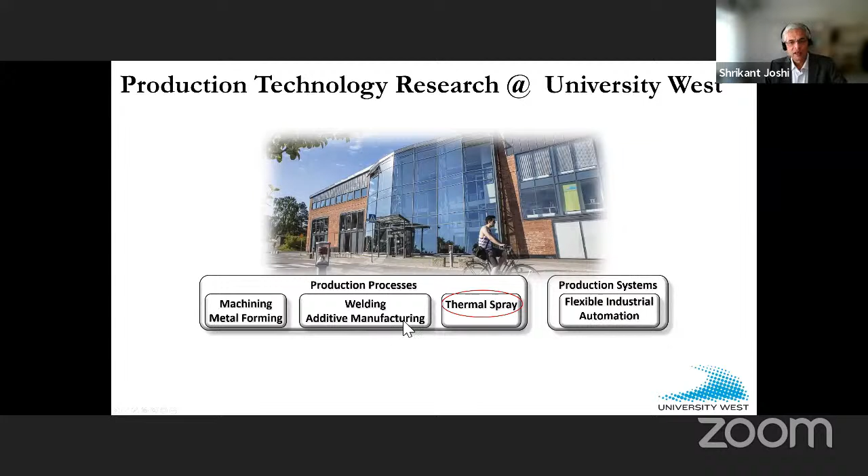Our thermal spray group is a modest sized one. We have 3 or 4 professors and a couple of PhD students. We've also had a culture of periodically inviting the best known names in thermal spray as guest researchers. Right now we have Professor Vassen as the guest researcher. Prior to this we had Sanjay, and even before that we had Ping Xiao from Manchester as a guest professor here.

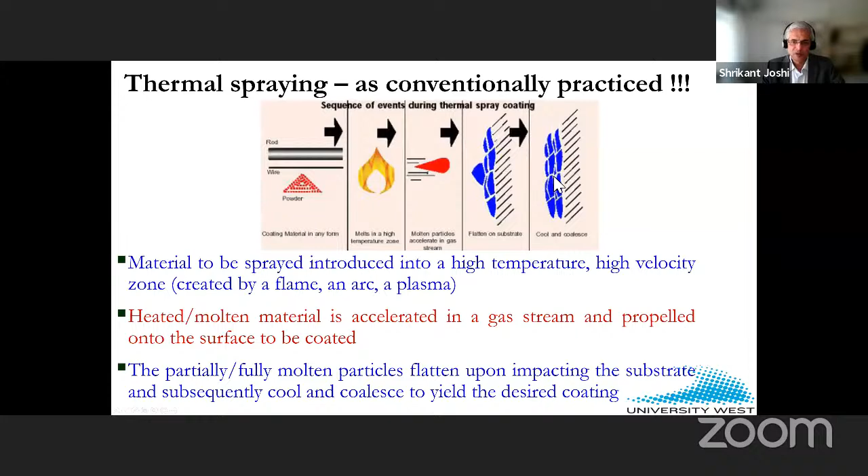You introduce a material from which you want to form a coating, sometimes in rod or wire form, but typically in the form of a powder. The idea is to melt this material, accelerate it to a high enough velocity so that it forms splats, which are like pancakes, on the part which is to be coated. You overlap these splats to cover large areas, and you stack them up to build thickness. So typically, that's how thermal spraying is practiced.

And what is usually the intent? The intent is to ensure that the powder particles you introduce are fully molten to obtain dense coatings, and that they also impact the substrate at the maximum possible velocity, because these are mechanically anchored coatings, so the adhesion strength is well correlated to the impact velocity. So these are the conditions I usually try to meet. And because of this need for high particle velocity, the residence time is typically on the order of milliseconds - all the action, melting, acceleration, impact, has to happen within milliseconds.

Now, if you look at the spray grade powders that are out there, typically there's an upper size limit, dictated by what you can melt during this short residence time. For relatively low-melting metallic powders it could be slightly higher - the upper limit could be 90 or 100 microns. For ceramics it's lower, and depending on the process used it could change a bit. But this is the reason for having an upper limit on your powder feedstock, which is easy to appreciate.

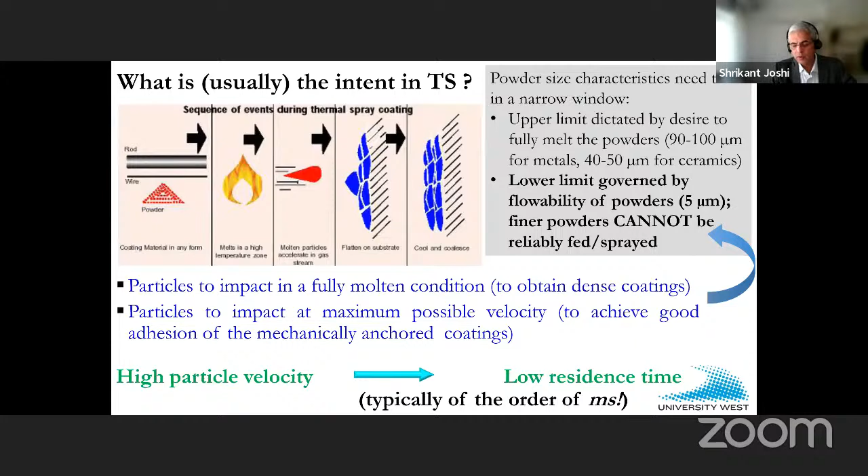But then there is also a lower limit, often dictated by the flowability of the powders. Typically, if your powders are 5 microns or smaller, it's difficult to reliably feed them, and therefore also to reliably coat them. And that takes us directly to the motivation for employing liquid feedstock - it's the most convenient avenue to create finely structured coatings without encountering the feeding problems normally associated with few-micron, submicron, or nano-sized powders, and thereby realize some very unique microstructures.

So there are two ways to do it. The simpler option is to put these fine powders into a suspension using an appropriate liquid medium. The more difficult approach is to not use a powder at all, but use a suitable salt solution, which will hopefully form the material of interest in situ. Examples of these salt solutions are typically acetates or nitrates, sometimes chlorides as well. These allow for very rapid exploration of new precursor compositions or their combinations. Most of all, they circumvent the need for using powder feedstock completely.

Is this use of liquid feedstock radically different? Depends on perspective. Here's a simple cartoon of what a conventional plasma spray process looks like. You have this plasma spray torch, there's a powder that you introduce radially, and all the heat-up and acceleration happens as we spoke about a moment earlier. When it comes to liquid feedstock, the only thing that really changes is that the powder delivery is replaced by a liquid feedstock delivery.

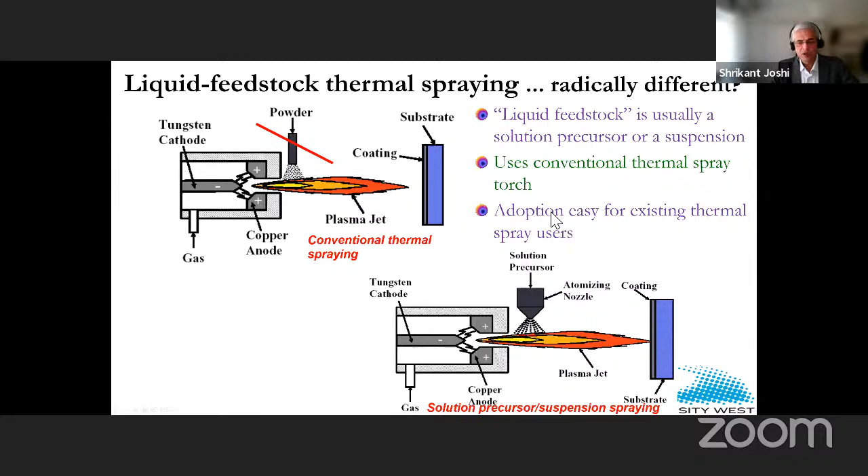The nice thing from my perspective is the fact that it uses conventional thermal spray hardware, and therefore adoption is relatively easy for existing thermal spray users. All that you need is a reliable liquid feedstock delivery system, and there's an increasing number of those available now.

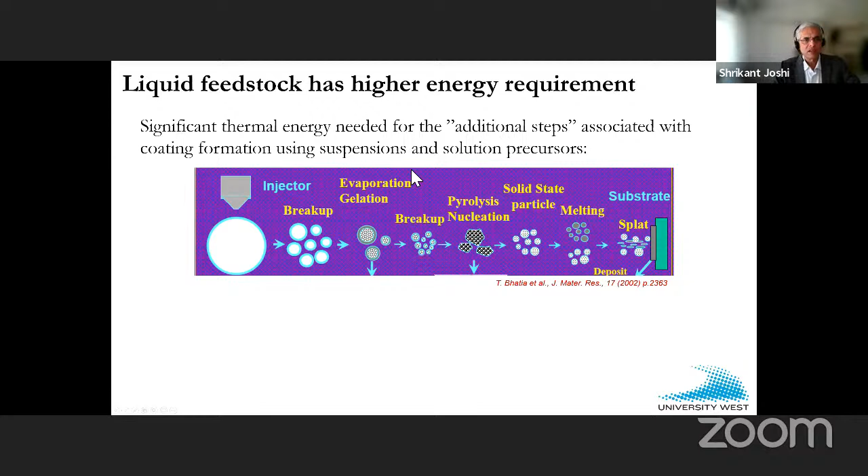One thing to remember is that the use of a liquid feedstock has higher energy requirements associated with it. What you see on this cartoon is from a publication very early on when people started looking at solution precursors. A lot of things need to happen for the precursor to get through gelation, then pyrolysis, then hopefully the powder of interest is formed in situ. From this point on, the powder behaves like one would expect: melting, acceleration, formation of splats. But all of these steps require significant thermal energy.

So if you were to go hunting for thermal spray literature employing liquid feedstock, you would find most of the early work utilizing plasma spray torches, because of this need for high thermal energy. Suspension plasma spray, solution precursor plasma spray are good keywords if you want to start looking for earliest literature on this subject. As we understood the subject more, we got a hang of how the liquid feedstock behaves in a thermal spray torch. People have started dialing down the thermal energy content and still get good coatings using HVOF, perhaps HVAF as well, as I will attempt to show towards the end of my talk.

When we first started work using liquid feedstock, there were several initial concerns, some of which I've listed here. One was that the processing window was quite narrow. The deposition rates were pretty dismal, and one struggled to put on a reasonably thick coating. I remember our first year or two of solution precursor plasma spray - we needed to spray coming in very close to the substrate, so there were substrate heat-up issues. If the jury was out then, most agreed that this was too far from being exciting on the thermal spray shop floor.

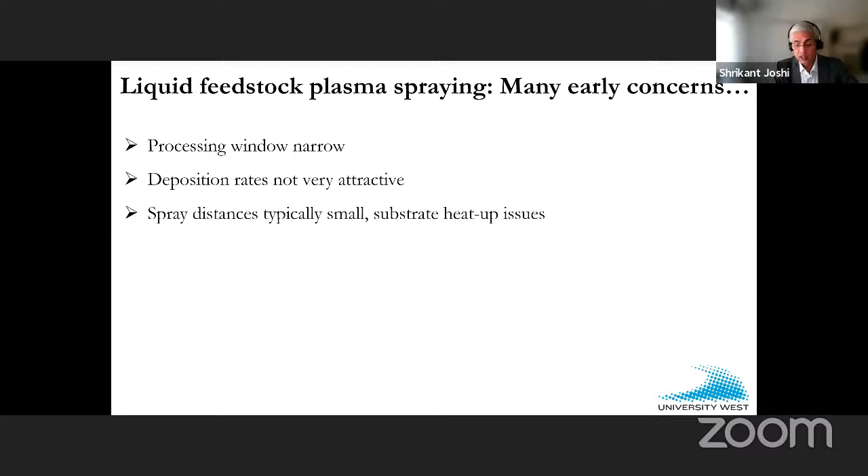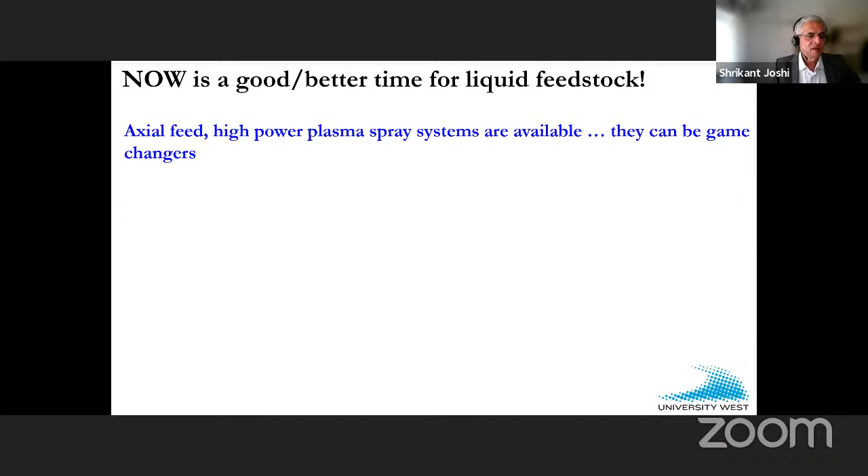Why? Because there are some pretty good axial feed high power plasma spray systems available out there, and they can really be game changers, because I am of the opinion that liquid feedstock did not get a fair hearing when we were all compelled to use radial feeding.

And the reason for that is when you use radial injection, the injection of the liquid feedstock is very sensitive to the injector diameter. It's always sensitive to the feed rate, particularly so when you inject it radially. And then you do not utilize all the energy that is available in a plasma plume. Considering the fact that the liquid feedstock per se needs more energy, we were destined to have problems with radial injection.

The ability to inject this feedstock axially kind of changes the game altogether. It allows very robust injection of feedstock. The deposition efficiencies have gradually crept up in a regime which is suddenly quite exciting, and this is achieved while enabling complete material treatment within the plasma plume as you desire.

So just to recap before we move on, of the two approaches, use of solution precursors and suspensions: suspension is clearly relatively easier since powders are already present, suspended in a suitable medium. In contrast, solution precursors completely do away with the need for powder feedstock, but then you need to go through more steps, and therefore it's far more challenging.

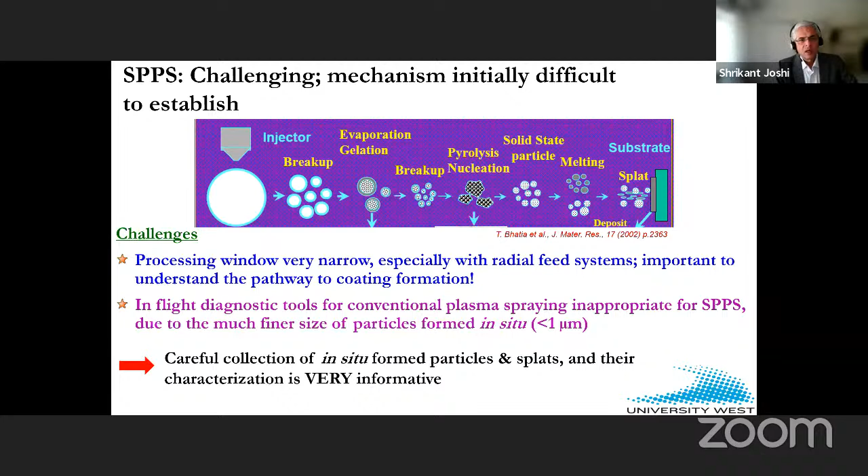So what we started doing during those early days is to attempt to carefully collect, or grab particles in situ, or what we thought was particles, and then also look at splats, and from then derive useful insights on how the process parameters may be impacting coating formation. Won't get into details at all due to lack of time, but just to let you know that collecting these kind of particles in flight have a story to tell.

Many times if you're way off from the right processing window or the sweet spot, you essentially get just gel. That's what you collect. But if you do it right, you begin to indeed form particles of the kind that you would want to form, to get good coatings.

So this was a good diagnostic tool in a sense, or alternative to conventional diagnostics. Similarly, the splat morphologies too are extremely educative. If you are way off kilter, you barely get splats. You get these gels or somewhat thermally decomposed salts.

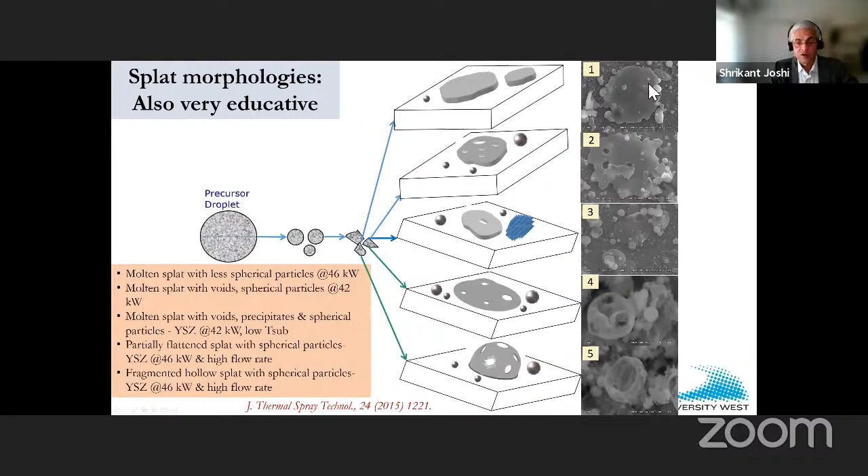If you're right, you begin to get nice dish-shaped splats. It's a little bit hard to see, but this is about just over a micron or a micron and a half. So that's exciting. This is the kind of splats you would be looking for if you're seeking a refined coating microstructure.

So as we went on, I think we learned more about what is the mechanism of coating formation if you use solution precursors. It involved flattening of particles formed in situ. In some cases, some of the gel went through secondary pyrolysis, but I think we got a good hang of how coatings form.

Not only that, this understanding led to a basis for us to be able to begin to tailor microstructures in solution precursor plasma spraying, from getting dense coatings to porous coatings, to even attempt to begin engineering vertical cracks in these coatings. So that was useful.

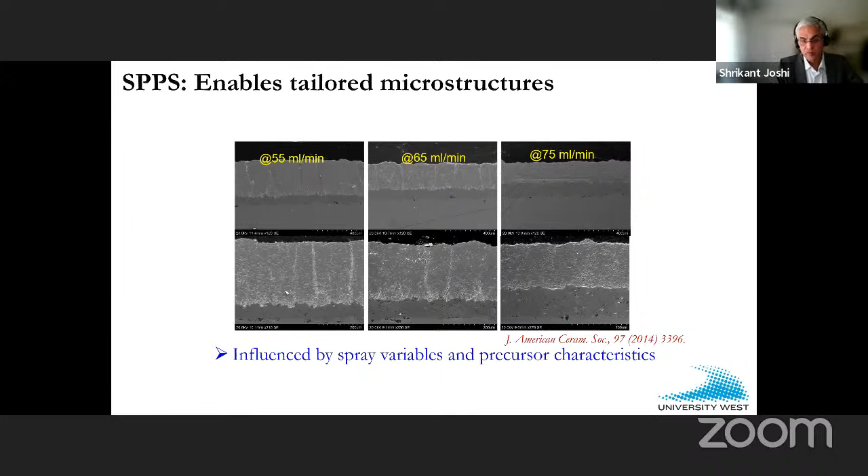As a subset of that work, I think we also began looking at the origin of vertical cracks. There's some very nice stuff you could do by collecting particles in situ, looking at splats, and then seeing how energy considerations lead to crack formation. So that was very useful.

All that work that I showed you up to this point was done with radial injection. And then when I moved here to Sweden, we had this lovely axial feed capable torch. Suddenly that broadens the process window like nobody's business.

So this was first shot, no struggle, and you get extremely nice coatings with what my colleague engineer calls dishwasher fluid. Use a dishwasher fluid as a precursor salt solution and get coatings which are thin, which are dense, which are controllable, and have a very wide processing window without falling away either in terms of crystallinity or the control that you desire.

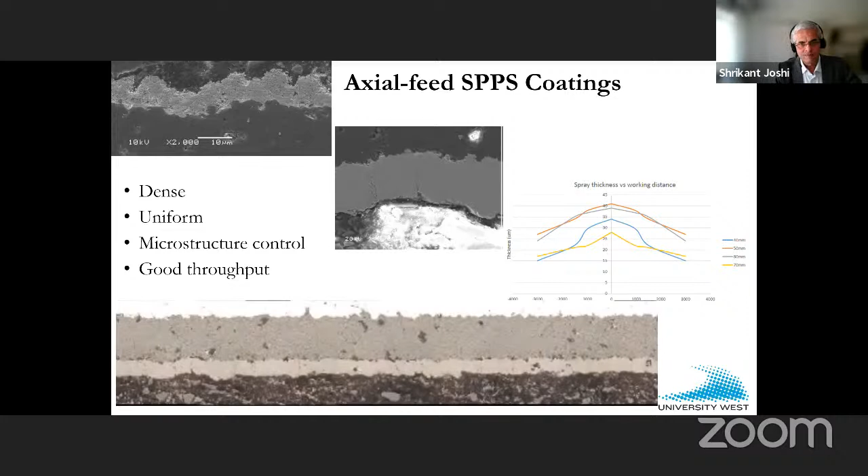So let's move on from solution precursors to use of suspensions.

Why did I say that the use of suspensions is relatively easier? That's because these additional steps, which are involved only in case of solution precursors, are eliminated when you use a suspension. You almost start there, right? And that also reflects in your energy requirements and ease of processing. The number of variables that can mess things up are reduced.

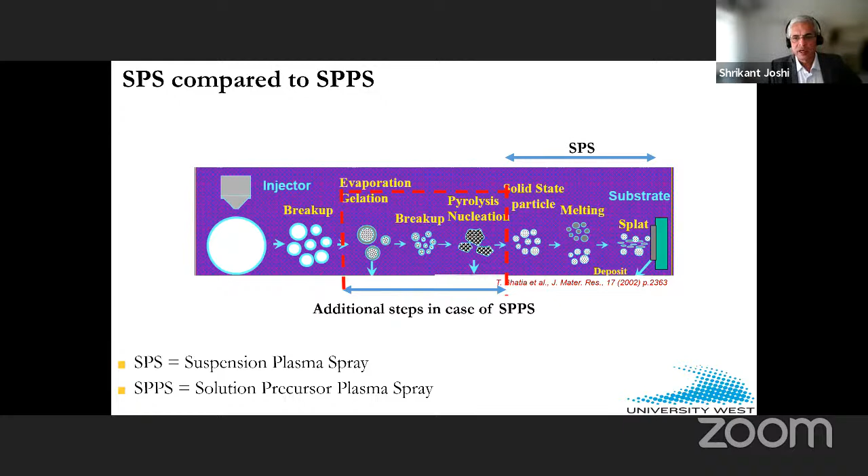As in case of SPPS, the use of suspensions also was originally driven by thermal barrier coatings. The reason being that very early on, experimental work revealed that you have a possibility using suspensions to get some sort of columnar structure, which is not exactly identical to electron beam derived columnar structures, but you get columnar structures which are strain tolerant and therefore bear promise to be used as TBCs.

So people even now typically compare EBPVD and APS, and suspension kind of lies somewhere in between and has advantages that are handpicked from both of these processes, which are relatively well established. It's much cheaper than EBPVD. It yet provides a columnar structure. It has potential to develop coatings with low thermal conductivity.

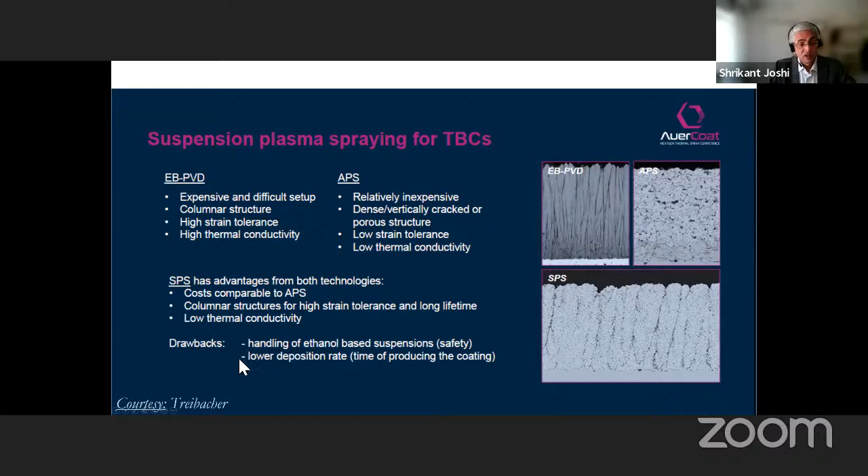You have a wide choice of suspension media now available, although most early work showed that if you are to target a columnar coating, you would have to use ethanol as a medium, which the industry does not necessarily like. There were also, as I mentioned, some reservations about deposition rate, but I'll show you that that was passed.

So some quick results from our own work in our thermal spray group here by my colleagues. One, we have been using SPS for thermal barrier coatings for a long time. We have demonstrated that one can almost control the columnar structure at will. You can control it for an identical suspension by varying the plasma spray parameters, or you could use different kinds of suspensions by varying the type of solvent, the loading rate, and also playing around with the particle size that constitutes the suspension.

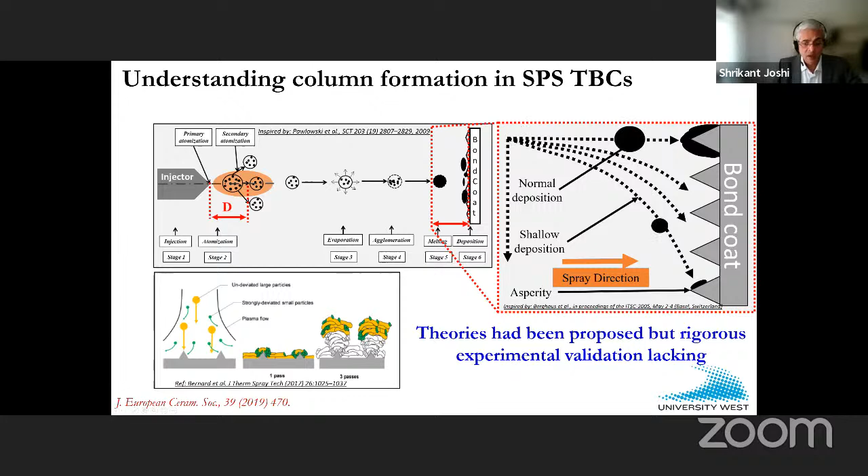We also spend a lot of time trying to understand column formation. When do you get columns? When do you not get columns? There were theories which had been proposed, very logical ones, but we spent a fair bit of time to validate experimentally the fact that we can indeed engineer columns or avoid them completely.

For example, these are illustrations of how the coating buildup occurs when you use ethanol or ethanol-water mixture. What I'm not showing here is if you used water, you get an entirely different coating formation. So if your target is getting a columnar structure, for most part, one would use ethanol, while use of water would give you a relatively dense coating.

One advantage of trying to dig into this column formation mechanism was also the fact that it allowed the thermal spray community to get a hang of how to avoid columns, which is necessary for many non-TBC applications. So that's something to remember for later.

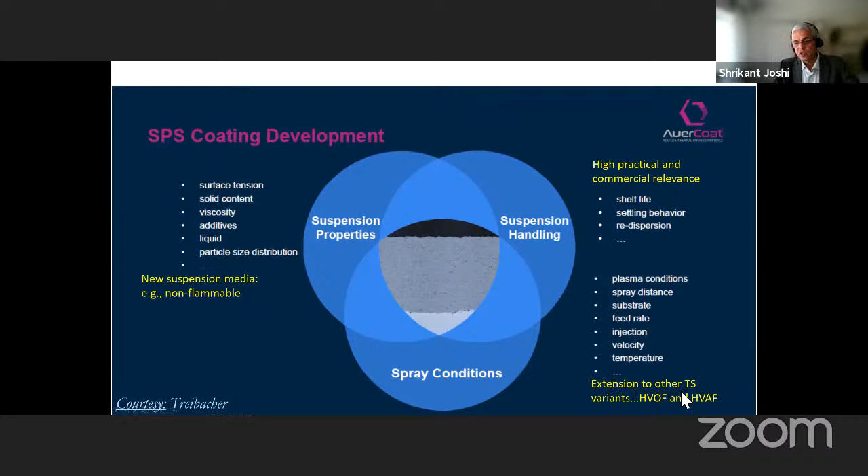And then, of course, there is this big chunk of applications to be harnessed if you're able to use suspensions with other thermal spray variants such as HVOF and HVAF.

A quick example from Treibacher about using an alternate non-flammable suspension medium. They've shown recently, for instance, that one could move away from ethanol, use a non-flammable, at the moment proprietary medium, and still get very good columnar structure.

The other thing that comes out from this particular slide, which is a reconfirmation of what I showed earlier, is that by increasing the spray power, one can get more pronounced columnar coatings and a higher deposition rate per pass. So it's a good area to be in, the development of new suspension media.

We were talking a little bit about throughputs. Now this is a TBC example. You're beginning to reach almost 50% solid loading YSZ coatings using the suspension route, and this puts you in a regime that's almost the same as what you'd typically get using a powder, as I'll try to show you later if I have time. The same is true for chrome oxide, for example.

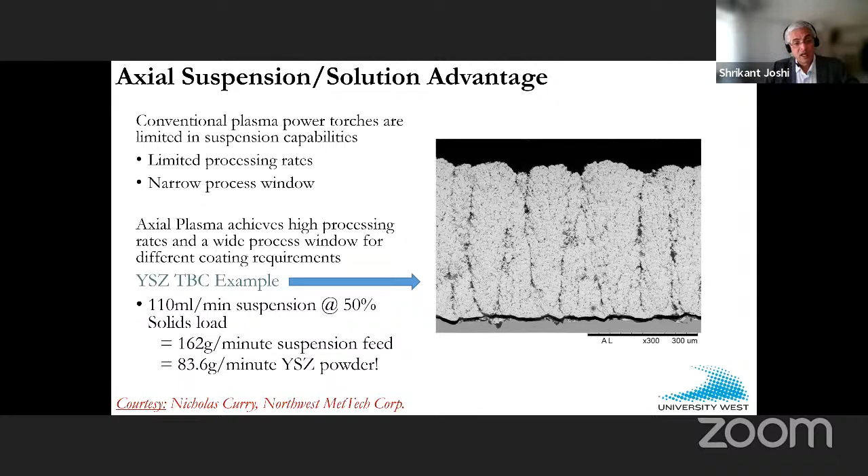Treibacher has been our partner in some of this work. They've shown that you can bump up the solid loading to as high as 50%, and that puts you in a very interesting regime already.

Some real numbers from our own work - before my time, honestly, this was done way before my time, but this data is from our lab here in Sweden. When we started doing these TBCs using suspension yttria stabilized zirconia, the typical solid loading was about 10%. To coat a 300 diameter test specimen, 100 height, with 300 microns would take us about 4 hours, and it would consume about 12 liters of suspension.

Fast forward to today, and we use barely 1.5 liters of suspension. We can accomplish this task in about 15 minutes. And then it begins to become really interesting for thermal spray practitioners.

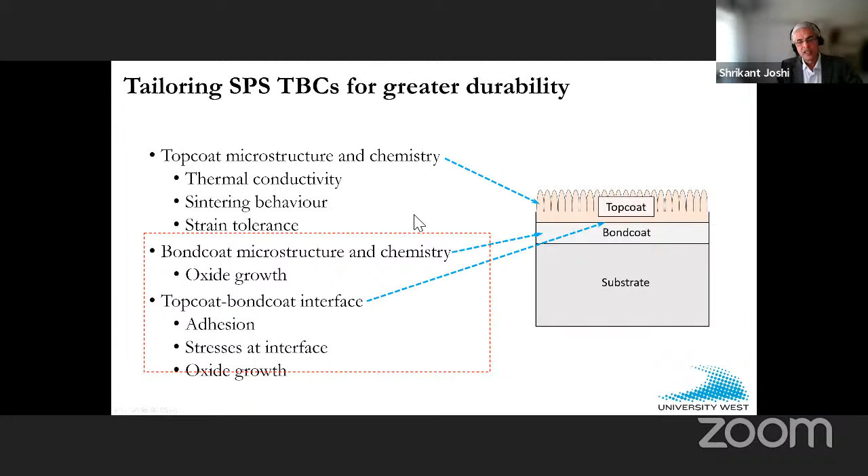We have also spent a lot of time trying to tailor SPS thermal barrier coatings for enhanced durability by looking at a variety of different things. We have been looking a lot at chemistry, moving away from yttria stabilized zirconia, for example. We have been looking at microstructure, column density, and things like that. We have been looking at architecture, single layer ceramic TBCs and multi-layer ceramic TBCs. It's been a long but very educative ride.

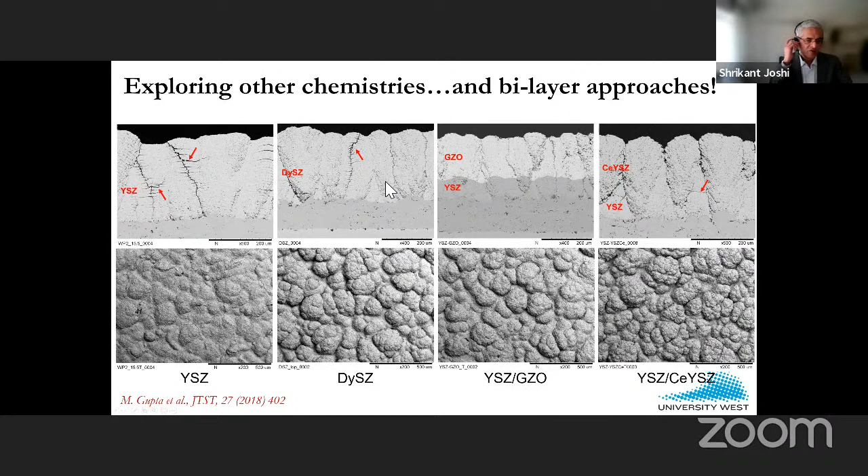Some examples from our group again. I spoke about multi-layer TBCs, trying to combine yttria stabilized zirconia and gadolinium zirconate. Also looking at some other chemistries of interest in an effort to reduce thermal conductivity and enhance coating lifetime.

To close the loop, we've been looking at not just microstructures, but how the coatings perform in thermal cycling situations, in burner rigs.

The other interesting area has been to look at bond coat topography and its influence on coating microstructure and lifetime. This is some of the work that looks at different pre-coating surface treatment on the bond coat, pre-coating of zirconia. As you see, you get remarkable differences in column density that influences coating life.

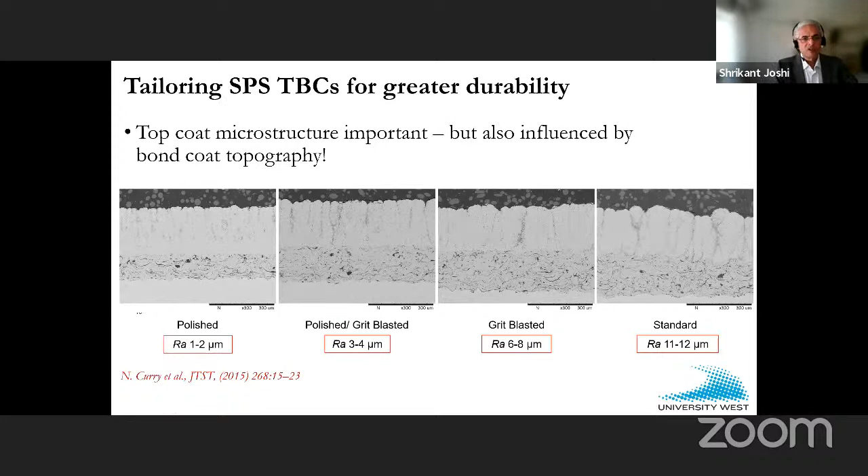Let me spend a little bit of time now discussing whether, and this has been a question for a long time, there is life beyond TBCs and now environmental barrier coatings for liquid feedstock. Because until a few years ago, a very predominant portion of the literature was targeting only TBCs.

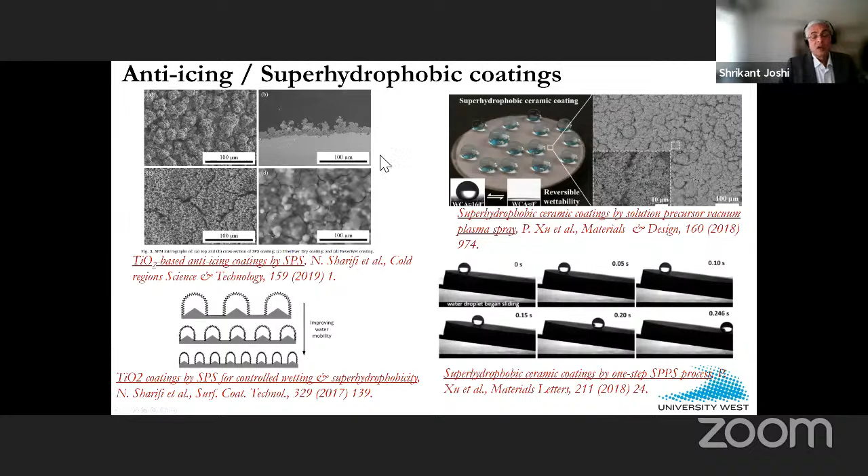But if you look around now, there indeed is some increasingly exciting work in areas that are phenomenally diverse. There is some work, especially from Christian's group, on anti-icing and super hydrophobicity. Quite a bit of that.

This is similarly some work that I did before moving to Sweden, targeting antibacterial applications using solution precursors - very complex precursors. If you have good friends in the chemistry lab and have a beer with them, it helps once in a while.

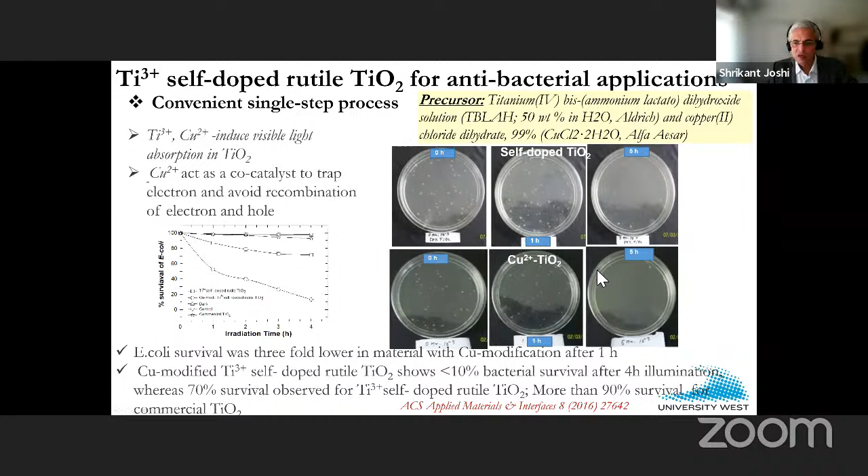It gives you coatings of a nature that are very hard to achieve by the powder route. In this case, the intent was to achieve Ti3+ self-doped rutile, and the chemistry guy said, you use this and you have a good chance. And sure enough, we did get coatings which showed extremely promising antibacterial performance using those kinds of complicated solution precursors.

There's a lot of action also in the area of electrode coatings. We are at the moment also working on solid state thin film batteries. There's been a fair bit of work in this group on SOFCs as well, as indeed elsewhere.

Fairly interesting. I just wanted to show this snapshot real quick of the immense possibilities that exist using both SPS and SPPS for realizing a vast spectrum of coatings, which seem complicated, but you do get them in a single step by engineering the solution precursors, for example, in a good way.

Over the past couple of years, we have also begun to look at what we believe is a very large segment of coating applications in the industry, which is where and whether we can begin to use the suspension spray route to realize some tribological coatings. We kind of know what the boundaries are, what feedstocks are, what kind of materials are exciting, and we know now pretty good how to tailor the suspension in a certain way.

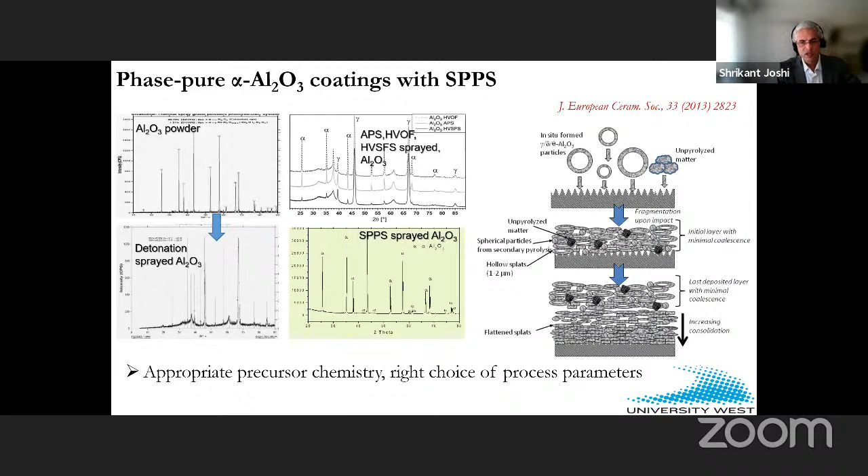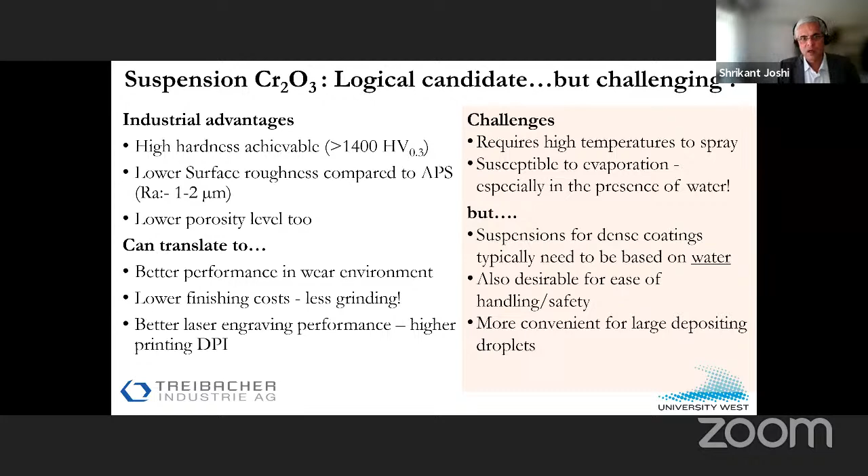So this was our modest beginning with SPS alumina using powder sizes which are 2 to 3 microns and lower, and we got pretty good wear properties, and that kind of encouraged us to move on to chrome oxide, for example, because this is an interesting material with significant industrial applications. Anilox rolls is a good example.

The other reason why it's a good application to target is because we believe that using suspensions can give you much better as-coated surfaces, which will reduce the burden on polishing and grinding, which is an absolute must for an application like an Anilox roll.

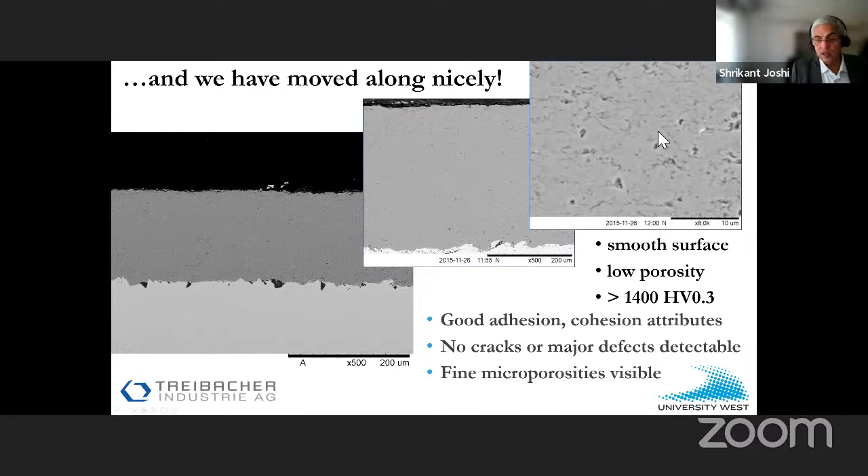We get very good chrome oxide coatings, this was all with 40% solid loading, and we've built on that further. First was to see if we could carry that to an HVOF, and this is part of Jarkko's PhD work, during my short stint at Tampere.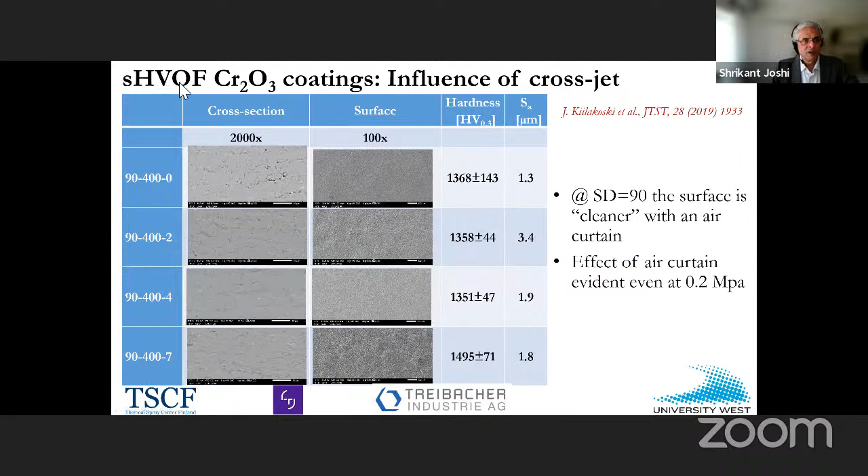And if you manage to optimize the process right, and we tried several things here, looked at spray distance, looked at employing an air curtain to reduce fines, you can get really good coatings even using suspension HVOF, which gives darn good wear properties.

Now the challenge is to push the envelope further, and try and spray with higher solid loading, and therefore improve throughput, reduce costs, and stuff like that. So there's some early work using higher loading, but this is still work in progress, and there is quite a bit of effort now being invested, especially in Treibacher, for example, to take this out.

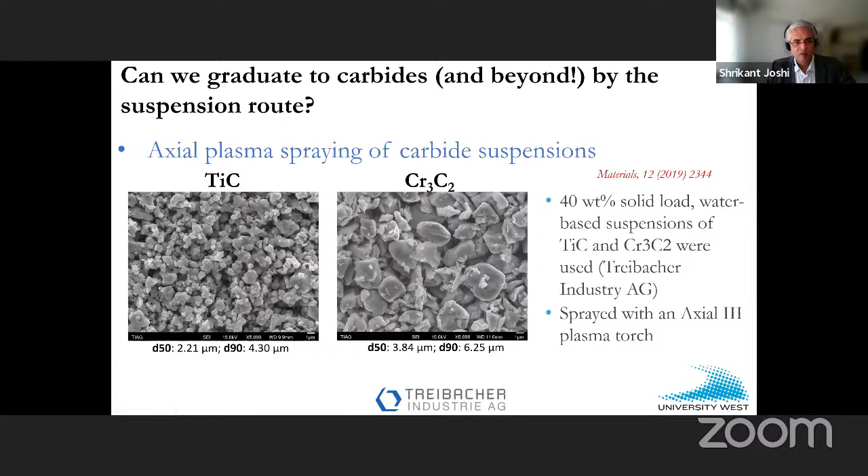Right, so alumina, chrome oxide can be graduated to carbides. So this is kind of a one-off work, I must admit, on using titanium carbide and chrome carbide in suspension form, without any binder, mind you. And we were kind of surprised to get pretty good coatings of titanium carbide and chrome carbide.

Good wear properties. We have tried to build this further, and that's how the idea of hybrid processing using suspensions originated for us. But for me, the story is a little bit older. This was when my colleague in my earlier job, Shiv Kumar, was doing his PhD, and we had just begun to do some work on solution precursor plasma spray.

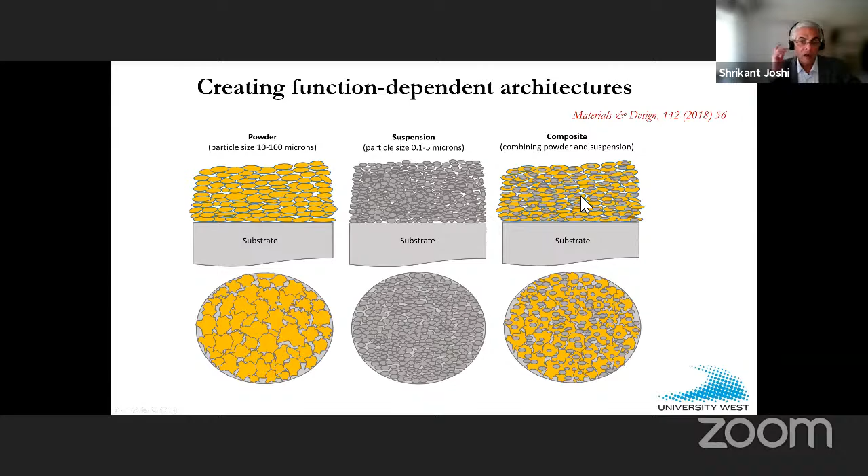What fascinates me about hybrid processing is the ability to create many different function-dependent architectures utilizing building blocks that are so different in size. If you combine typical powder splats and suspension, you can get a very unique structure in the form of a composite coating, and this can provide flexibility that otherwise does not exist.

There can be very interesting ways to combine these two building blocks by introducing powder and suspension simultaneously if you want a composite, or sequentially if you want a layered architecture. Imagination really is the limit. Or you could tweak these relative feed rates on the fly and get functional grading. So you can do many fun things if you're able to get this right.

But by the time we got here, we were kind of addicted to collecting powder samples in flight and seeing what's going on. The first question was pretty mundane at that time: can we first of all spray powders and precursors together? Is there a processing window that allows us to address powders and precursors at the same time?

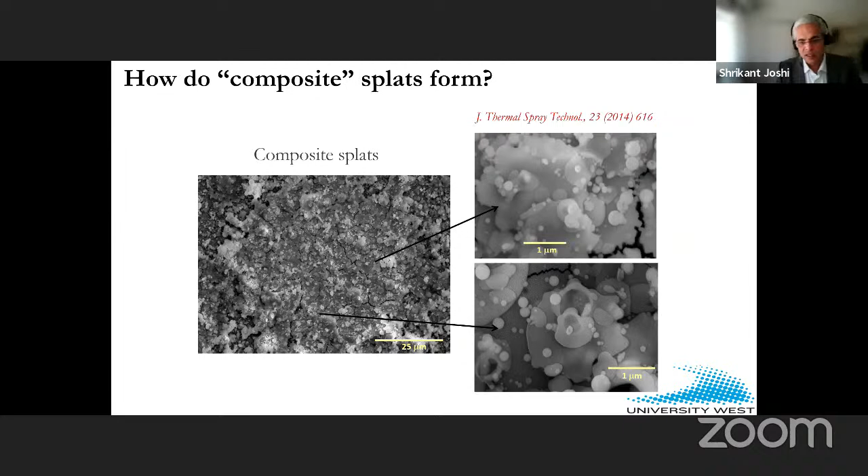So you can also see this impression on a splat. If you're careful, and as biased as I am, imagine this is a big splat from the powder, and all these tiny things are actually small splats derived from a solution precursor. So even in a splat, you see these two entirely different scales, and it reflects in many different ways depending on the application of interest.

Here is an example where we had used yttria stabilized powder and the right kind of solution precursor to also form yttria stabilized zirconia, and that serves to toughen this in a way. So we found these coatings to be ideal when you wanted a combination of thermal cycling, lifetime extension, and good erosion resistance, for example.

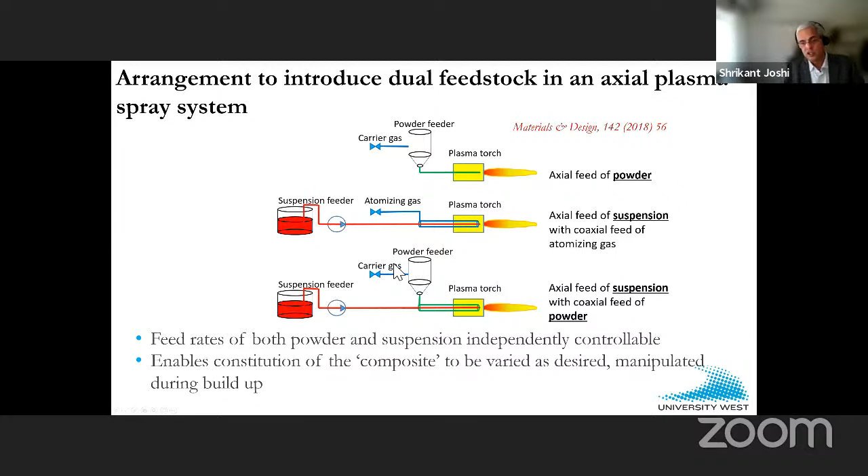And we've also done this for a couple of other systems at that time. Given the promise of this hybrid feedstock approach, we've here at University West spent a fair bit of time coming up with an elaborate arrangement that allows us to effortlessly introduce both suspension and powder feedstock simultaneously or sequentially into our gun, and we've played around quite a bit with that now.

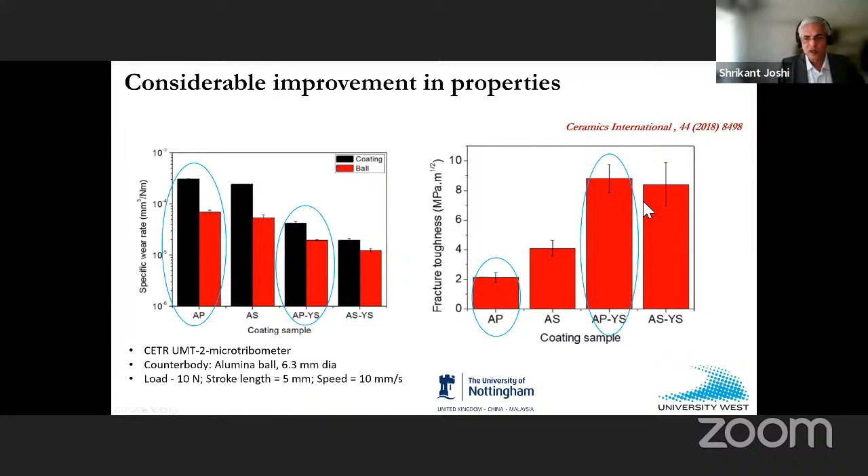We've formed composite coatings like alumina YSZ. This is some work that Tanveer did using some of these coatings, and the benefit of using these kinds of reinforced coatings using a hybrid approach was quite clear - much better fracture toughness, much better wear properties, and stuff like that.

Some more examples, alumina chromia. This is something that was done by Radek's group in Prague. And we've kind of carried this on in a sense - we are now looking at other exciting hybrid systems.

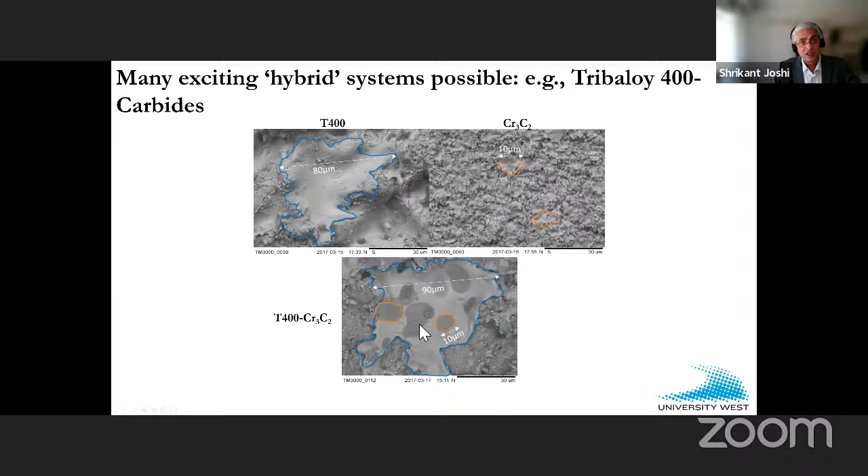One is incorporating carbides in, let's say, a matrix of Tribaloy. No good reason to use Tribaloy actually, except for the fact that we wanted to try this out and we had a Tribaloy 400 bottle sitting on the shelf there. But what this does is clearly show you this multi-component splatting in situ, and the ability, of course, to control the carbide content at will and get good properties.

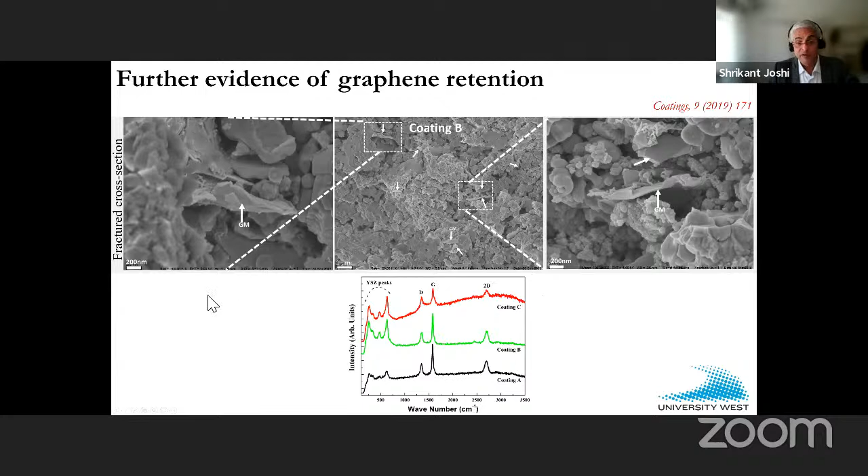We've done since then many different things. Use this liquid feedstock approach to incorporate graphene in many different matrices, and it's not as if you need to go hunting for graphene. Sometimes there's a tendency for us researchers to do that, but this is everywhere. And we've confirmed this with Raman, we've tried to quantify that.

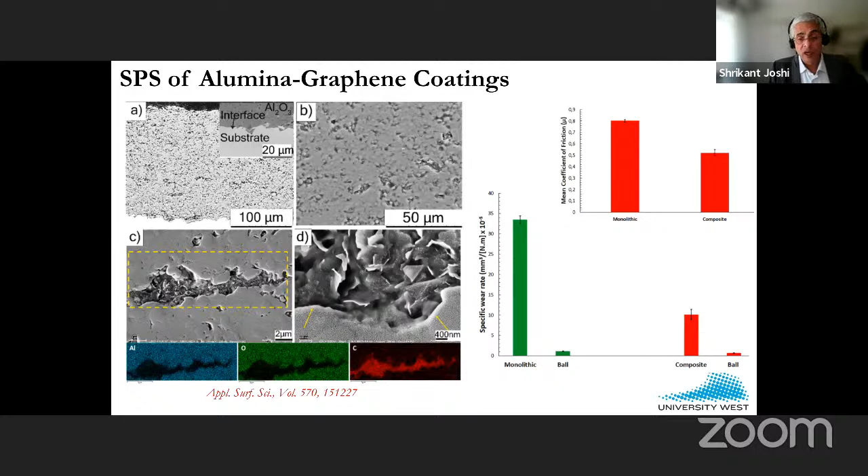We've done wear tests with it. We've also, after this work with alumina, incorporated graphene in yttria stabilized zirconia and thermal cycled that, shown it to survive up to temperatures as high as about 400 degrees. So yeah, we love this hybrid approach in a sense.

Some of our recent work is on solid state battery materials, thin film batteries. We've essentially started with two different materials at the moment, lithium titanate and NMC.

I think this is pretty good for a first shot, but this is the subject of a recent project that we've got, and we're kind of excited about this. We are not self-sufficient in terms of being able to address issues of electrochemical activity, etc., but we do work closely with the battery lab at

Uppsala University to do this kind of stuff. So where do we go from here? We really wanted to do something wild and see if we could use suspensions with HVAF. I almost feel stupid now because at the beginning of my talk I said liquid feedstock requires a lot of thermal energy, right? And now we have traveled quite a distance and are talking about deploying suspensions with HVAF, right?

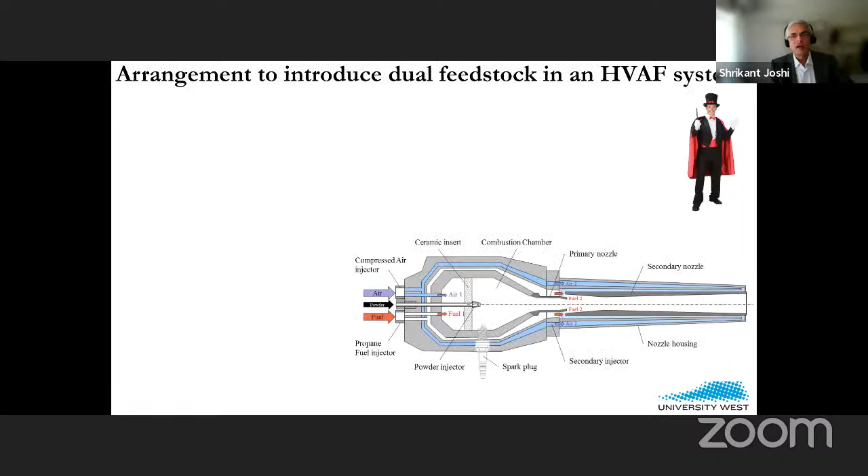Yeah, we've done a fair bit of experiments with this idea and shown that if you're careful, if you have good engineer colleagues, you can do this. You can overcome the very high back pressure that, as one might imagine, is present in an HVAF, but still get the suspension through and do some pretty good stuff, right?

One of these involved incorporating the same chrome carbide that I showed you earlier in Inconel to try and combine good wear properties with good corrosion properties, with good wear as well. So we did that.

More recently, we've attempted to incorporate graphene as a lubricating additive, let's say, to reduce friction coefficient in nichrome chrome carbide coatings. Yeah, we know this still needs some engineering work, but clearly there is early promise to be able to do this, right?

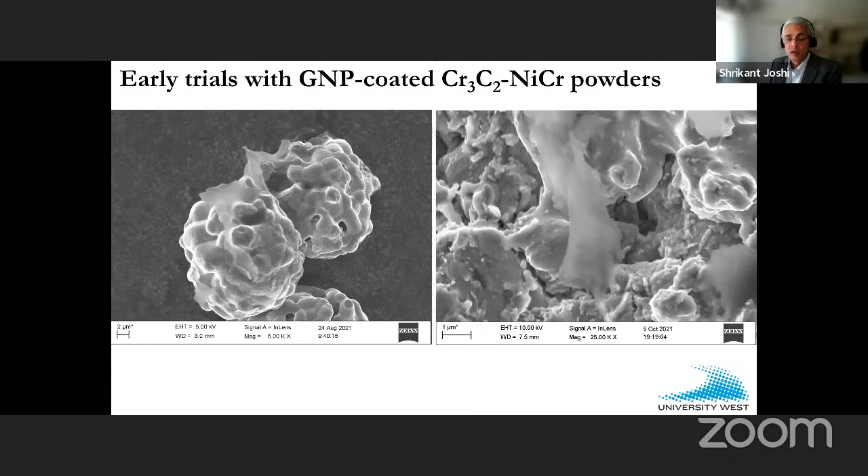We've also been using this hybrid approach to now look at a variety of solid lubricants. The hexagonal boron nitride is just one example, but you can do that. Also some good work combining capping of chrome carbide nichrome with graphene nanoplatelets and supplementing the graphene in suspension form by using the hybrid feeding.

I see that I'm almost out of time, so I would like to leave this here. I hope I gave you a flavor for what use of liquid feedstock can do. I think it brings a lot of new excitement to thermal spray. Granted that it is work in progress, but I think there are many new applications domains that beckon if we can do it right.

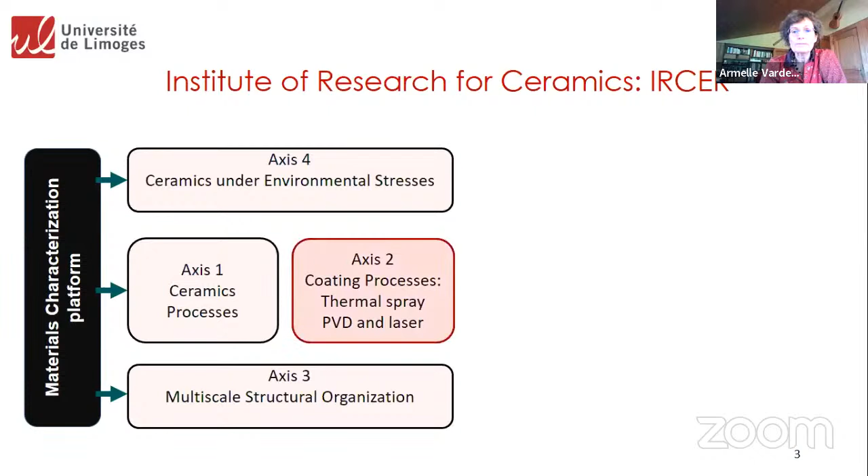I'm working in the Institute of Research for Ceramics in France. This institute is part of the University of Limoges, but it's also part of the French National Center for Scientific Research, CNRS. In our lab, we have 4 teams. For the people working with coating, we are involved in the second team, called coating processes. In this team, we deal not only with thermal spray and cold spray coatings, but also with PVD and laser coatings. There are 47 persons in this team.

Our specificity is that we have developed a joint lab with the French Alternative Energy and Atomic Energy Commission, the French CEA, which is in charge of all the nuclear plants in France, and these are becoming more and more important for producing our electricity. We are developing specific coatings able to sustain extreme conditions. Just 3 years ago, we also set up a new joint lab with Safran and Oerlikon for thermal spray and PVD coating.

The name of this lab is Proteis, and it comes with its own technological platform called Sapphire. You can see the building here, this technological platform, and here our lab - about 400 meters from our lab in the center of France, Limoges. The good thing is, with this technological platform, we have access to the most recent equipment in PVD, but also in thermal spray. For example, we have now, and will soon get, the Surface One equipment from Oerlikon. We also have access to equipment for testing coatings in real use, but only for aeronautical applications.

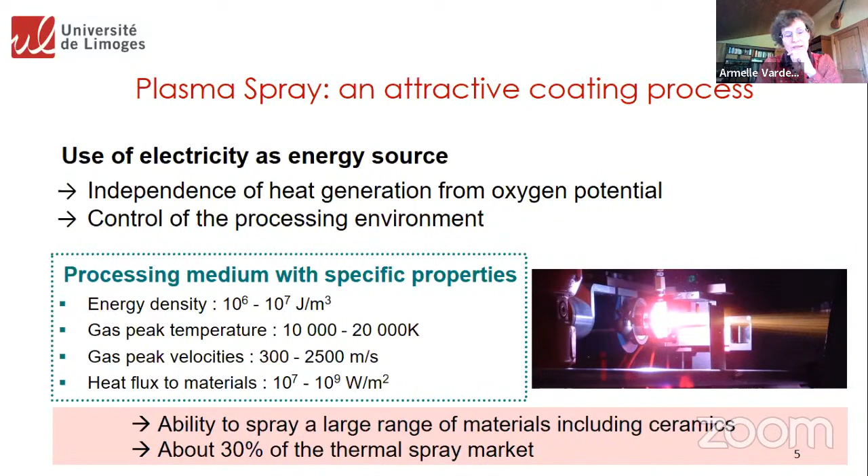Now, if we look at the thermal spray market, plasma spray is about one third of it. This was reminded by Professor Singh yesterday, and it's an important process. If we look at the process itself, it's not so different from other thermal spray processes. We can divide this process into 5 subsystems. Why 5? Because each subsystem is described by specific theory and specific equations.

First, we have the formation of the plasma. Second, the injection of the material into the plasma jet - this material can be a powder, but as reminded and well explained by Shrikant, it can also be a solution or a suspension. This material is injected into the plasma jet and processed there. After that, it will be accelerated, melted, and it will impact on the substrate where it forms the coating. We also have to take into account the motion between the torch and the substrate, which affects the growth of the coating, as well as the coating and substrate temperature during deposition.

But if we look at these 5 subsystems, they are interconnected, of course, but everything begins in the plasma torch. So the plasma formation will affect all the other subsystems, and if there is some problem with this plasma formation, you will find the problem also in the other subsystems.

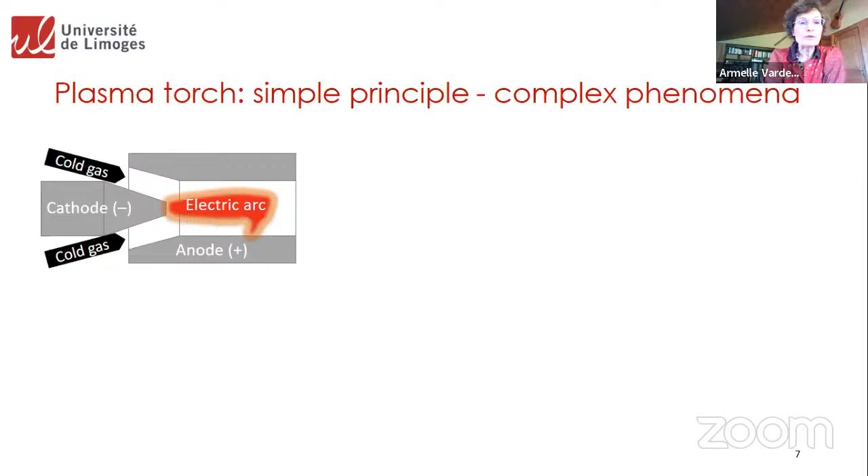The cold gas is injected around the cathode. Now, in most plasma torches, we will have some swirling injection around the cathode, and some arc will strike from the tip of the cathode to some point in the anode. It has to connect to the anode, and it connects thanks to a small, thin, but very hot and so very low density gas column.

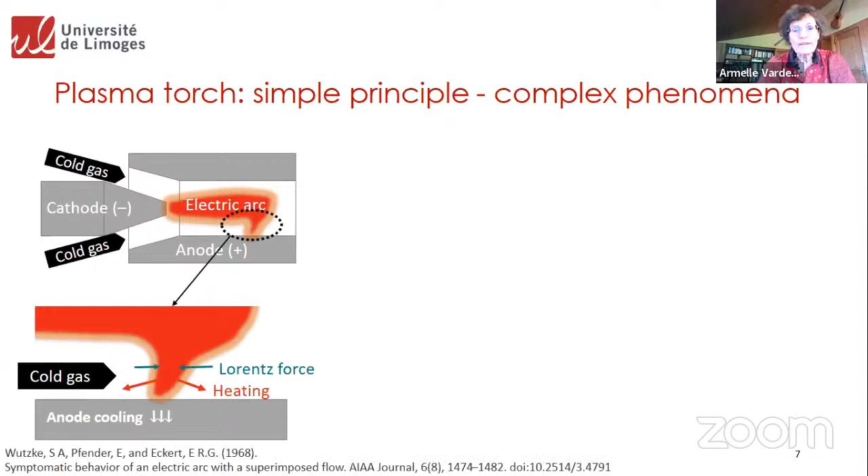Because of this low density and hot temperature, this thin column will be subject to some force from the cold gas flowing in the boundary layer close to the anode, but it will also be subjected to the Lorentz force produced by the electromagnetic field resulting from the circulation of the current and the specific curvature of this thin column. And it will also be subject to some heat phenomena because it will undergo a very intense cooling close to the anode wall, and at the same time it will exchange heat with this anode.

So if you take into account this force balance, this energy balance, and also some possible acoustic phenomena in the cold gas upstream of the cathode, you will get this type of arc voltage. The voltage is one of the most important features of the plasma torch, and it's really the language of the torch.

If you look at the voltage, how it changes, how it varies with time, you can understand a lot from the operation of the plasma torch, how the arc is moving, if the electrodes are worn, and so on. So it's very important to look at it and try to understand what the arc is doing, depending on this arc voltage variation. It really reflects the stability of the anode arc attachment, and it's also proportional to the arc length.

For any coating manufacturing process, the goal is always the same: how we can control the coating process and so control the coating properties. For plasma spray, it's not so easy. It has been reminded on the talk of Christian Moreau Monday. Plasma spray involves a large number of variables, and they are not fully controlled yet. If you think about the wear of the electrode, but also the wear of the powder injector, suspension injector, and some clogging possibility, it's not easy to control everything.

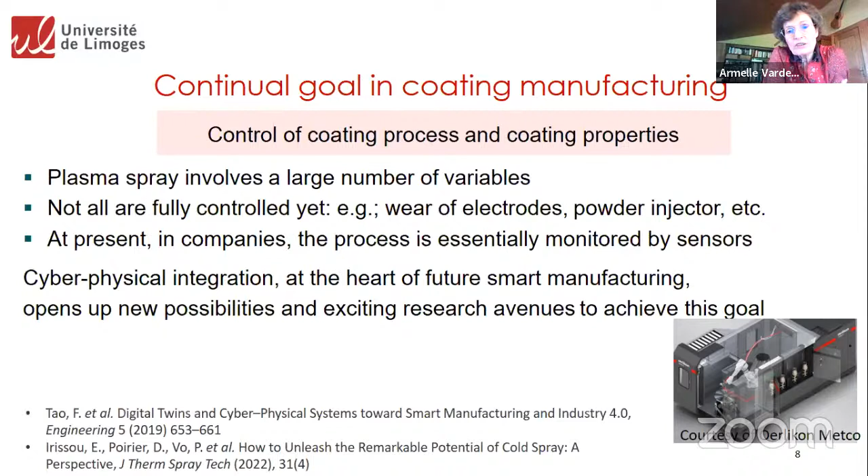So now what companies are doing, they are using sensors during the deposition process. But as you know, we are all now entered in the digital age, and we can benefit from the new connection and the new network technologies, information and data acquisition systems, and these are changing the way people are thinking about coating manufacturing control.

The idea is to go from a knowledge-based coating manufacturing to a data-driven and knowledge-enabled coating manufacturing. One of the most promising tools for that is the digital twin. What is a digital twin? I think everybody knows, but just to remind you, a digital twin is supposed to represent the coating process and coating performance in a digital world.

It should be a high fidelity representation of the physical world, and it mostly contains three parts: the physical space, which involves the process but can also involve the coating; the virtual space, which in that case involves both the process and the coating; and you have exchange of data and information between both. Digital twins are thought to be able to make the process more reliable and predictable.

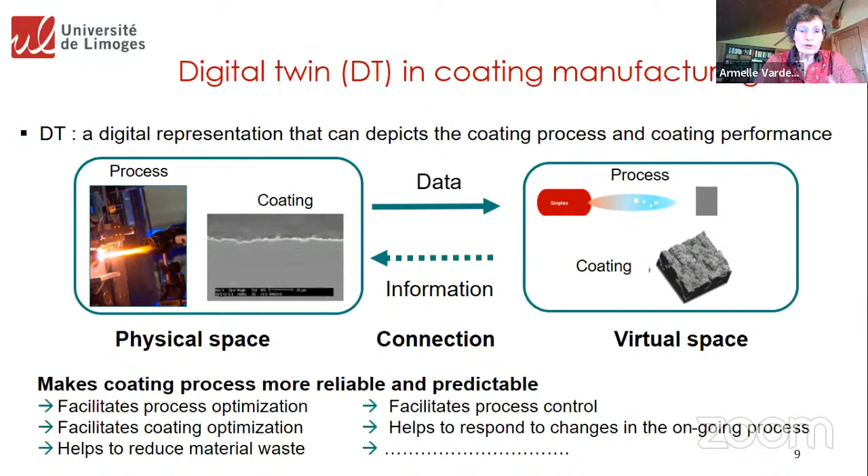They can be used for process optimization, coating optimization. They can also facilitate the process control and so on. If we look at the digital twin for plasma spray, but it's the same for any digital twin, we can see five components. The first one is, of course, the physical space, and the second is the virtual space. In between, you will have big data, machine learning, and connection between all these parts. And when you develop a digital twin, these five parts have to be considered at the same level. They are of the same importance.

Now, if you look at the virtual space, one of the components is a mechanistic model of your physical space. What is that? A mechanistic model is only a model that will use some theory based on physics law, chemistry law, mechanics law, and so on, to model and to be able to reproduce what occurs in the real world.

So in this talk, what I would like to do today is just to share with you some interrogation we have about the model we are developing. We would like to implement this model or to use it in a digital twin of the plasma spray process, but as you will see, there are plenty of questions about the model.

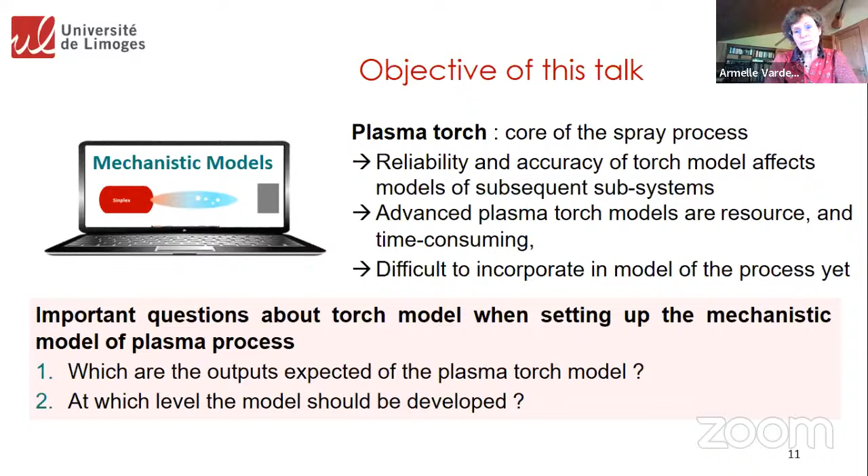There are two questions I call the preliminary questions. First, which output do you expect from your plasma torch model? Before beginning any model, you have to be sure of what you want to get from it, because depending on the output you are expecting, you can adapt and change your model. The second question is at which level we need to develop this model to have an accurate and reliable representation of the real world.

Just to remind you, when you have a numerical model, first you put down some assumptions, and depending on your set of assumptions, you select some equations. After, you impose some boundary conditions that will limit the physical space of your model. You use some grid that covers the physical space of the model, some numerical algorithm, and the properties of the gas and materials. From all that, you get some prediction.

So today I would like to show you how, if you change one assumption or one boundary condition, you can affect the model. I think it's important to see this, especially when you don't develop the models yourself, because afterward you'll be able to ask more questions to the people who develop the model.

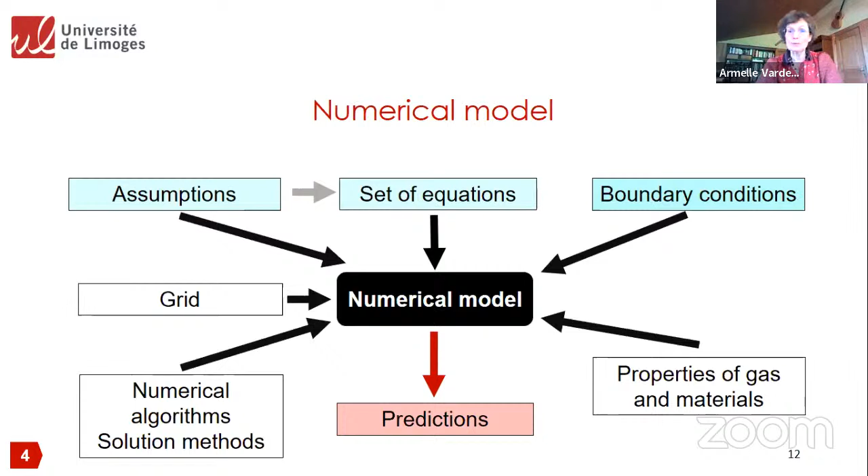So I will present first the input and output of the mechanistic model of plasma spray, and remind which are the main outputs and features of the plasma torch model. I will show the plasma torch we are using — a commercial plasma torch developed by Oerlikon Metco — and we are working on its model in the context of our lab with Safran and Oerlikon, the Proteus lab.

I will show you how, if you change one boundary condition and one assumption, you affect the model. So from the mechanistic model of plasma spray, what should be the input data if you intend to use it in a digital twin of the plasma spray process?

It's important to understand that the only input data you can use are the ones accessible to the sprayer — that is what you have. You have a torch design, a part geometry, and you select some process parameters. You also select the material you will spray, the material of your part and substrate, and the gas. Because of that, you will have the properties of the gas and the materials.

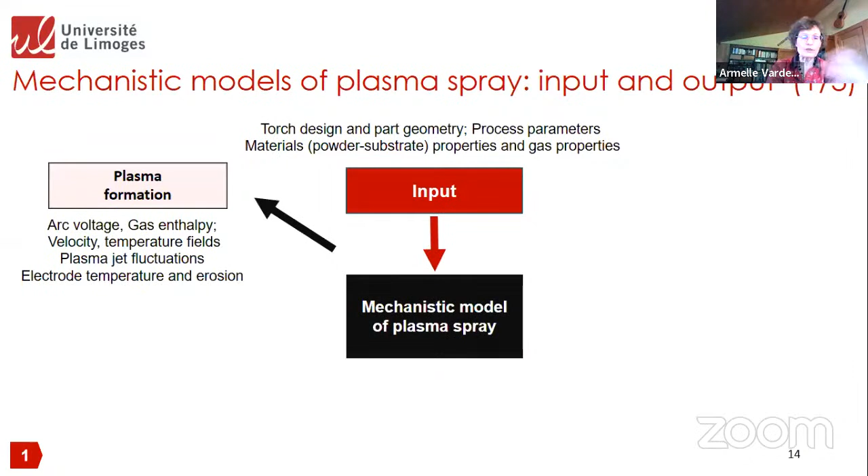This should be the only input data of your model — you have to limit as much as possible all the variables you can adjust. From that, you develop models of plasma formation, coating material injection, processing of this material in the plasma jet, and coating formation. From the coating formation, you get the coating architecture and microstructure. Shrikant has shown a wonderful picture of such a coating, and with the model you should be able to produce such microstructure.

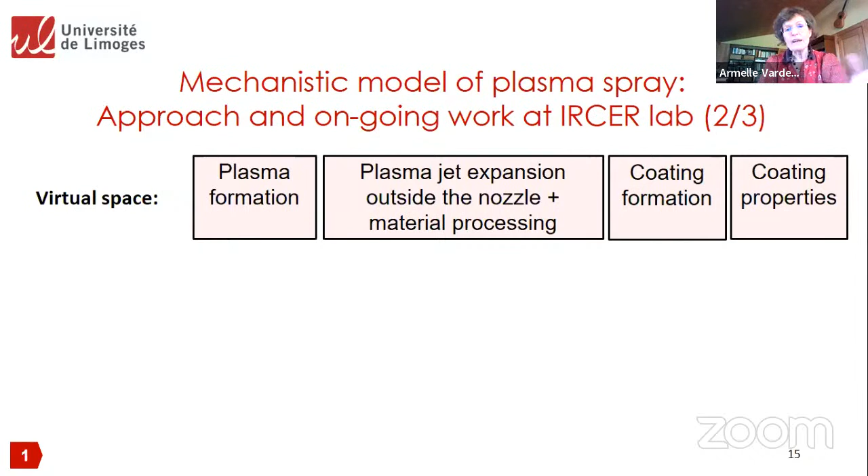We have also decided to use the code best adapted to the phenomena we want to model. For example, for plasma formation we use a specific code, which is different from the one we use for modeling and predicting the material processes.

All these codes exchange data through a transfer platform, and this platform is also fed with data coming from the real world. This data is used to validate the predictions of the model, but also to begin building the digital twin.

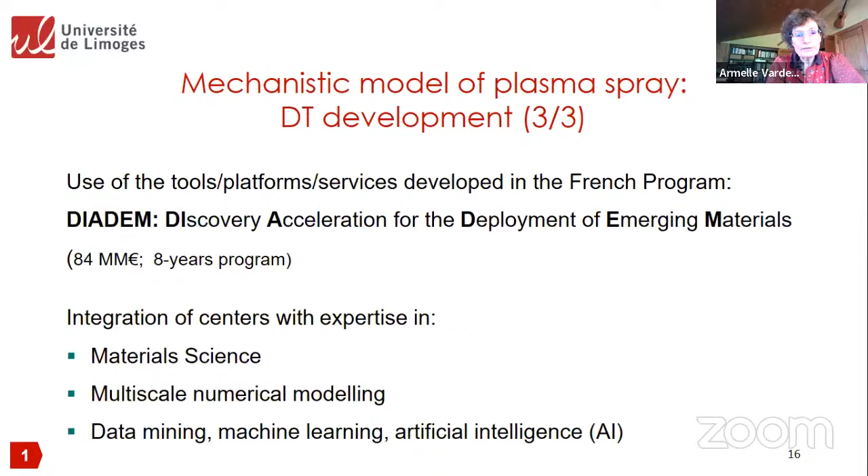Our lab is partner of a French program called Diadem, which has the objective to build the tools, platforms, and services that can be used to develop digital twins. Part of this program is to develop digital twins for materials manufacturing processes.

In this program we have centers with expertise in material science and manufacturing, but also centers with experience in numerical modeling, data mining, machine learning, and artificial intelligence. So we rely on this program to develop the tools we will use for our digital twin. Now, for the plasma torch model, what do you want to get?

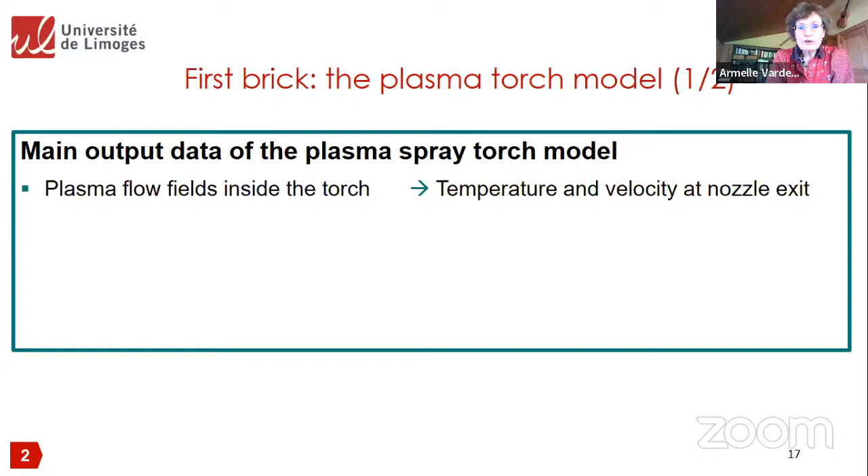First, of course, the plasma flow inside the torch—that is plasma velocity and plasma temperature. And you need also to have this temperature and velocity at the nozzle exit, which is also very important.

The second main prediction of the plasma torch model is where the arc will attach and how it will attach. This makes it possible to predict the time variation of the arc voltage and the enthalpy input to the gas, but also to predict the time variation of the plasma jet and the electrode temperature distribution. And this is the gateway to the prediction of electrode erosion.

If you think about these data, they are not easy to measure inside the plasma torch, and some are even impossible to get. So we have to validate our predictions. For that, what can we use? We have the arc voltage, the thermal efficiency of the torch, the thermal balance, but also the cooling water temperature and post-mortem observation of the electrodes.

All models dealing with plasma torches for spraying, cutting, or welding use the same approach—a magneto-hydrodynamic approach. We solve at the same time the Navier-Stokes equation, the heat equation, and the Maxwell equation, and these equations have to be solved simultaneously.

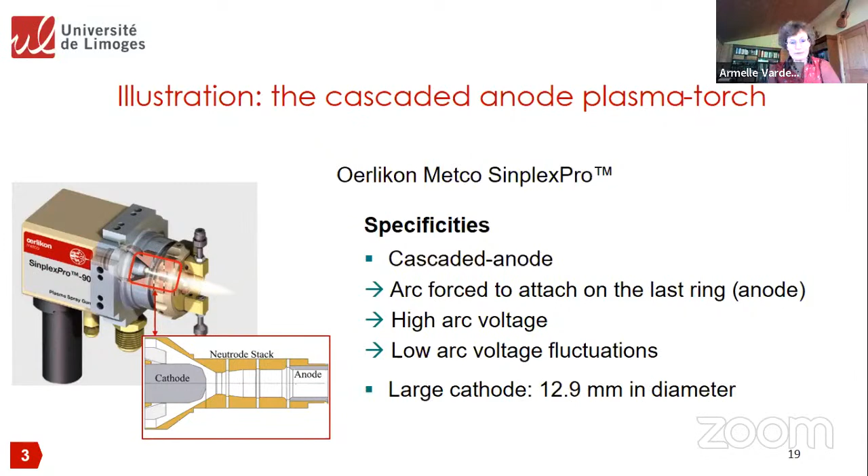Here we will use a cascaded anode plasma torch developed by Oerlikon Metco, the SinplexPro plasma torch. This torch has a specific design: if you look inside, you see that the cathode and the anode are separated by a neutrode stack. The idea is to force the arc to attach to the last ring, and if possible maintain the arc attachment on the last ring, so that we have high arc voltage and low arc voltage fluctuation. It also involves a very large cathode.

Now, which are the main features of a plasma torch model needed to get reliable and accurate predictions? I am giving a list that results from our own work, but also from the literature and from the many publications by labs working in this field—not only thermal spray, but also welding and cutting with plasma torches. One of the important features is to have a 3D and time-dependent model.

We have to use the actual geometry of the torch, not a simplified geometry. We have to have the electrode in the calculation domain, and we need an accurate description of the cold gas injection into the arc chamber. If the gas is injected with swirling injection, you need to have that swirling injection as input data in your model.

Now I would like to discuss the magnetic field. We will change one boundary condition for the magnetic field and see how it affects the result, and also discuss one assumption and see how it affects the result. This assumption deals with whether or not we consider the thermal non-equilibrium that exists in the electric arc.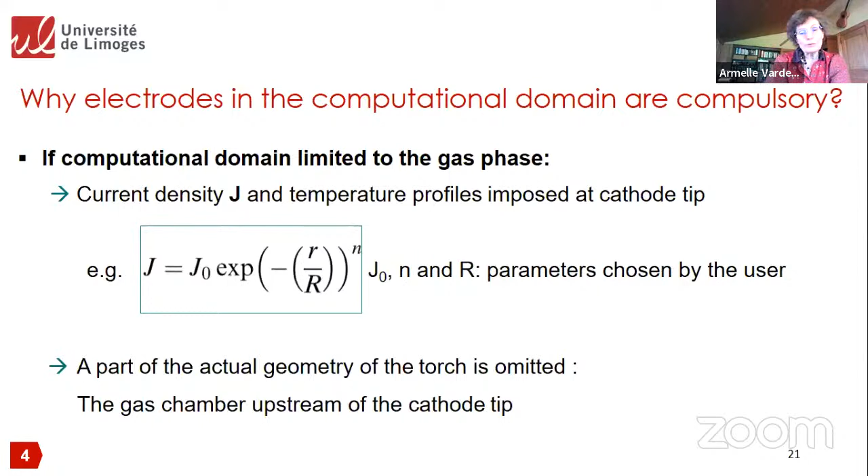If you want to develop a predictive model that can really be a twin of the real world, this is a problem, because each time you change a process parameter—for example the arc current or the gas—you have to reselect these parameters, and it's not obvious how to select them. You need experiments or experience. Also, if you don't have the cathode, you omit part of the geometry of the torch, and experience has shown this leads to problems in the prediction.

So the other solution is to include the electrode, in which case you only use arc current as the process parameter. Of course, now you have to solve the electromagnetic and energy conservation equations both in the electrode and the gas.

But in compensation, you will get the heat flux to the electrode and the electrode temperature. And so you have also more validation of your model because you can compare what you get with the observation of the post-mortem electrodes.

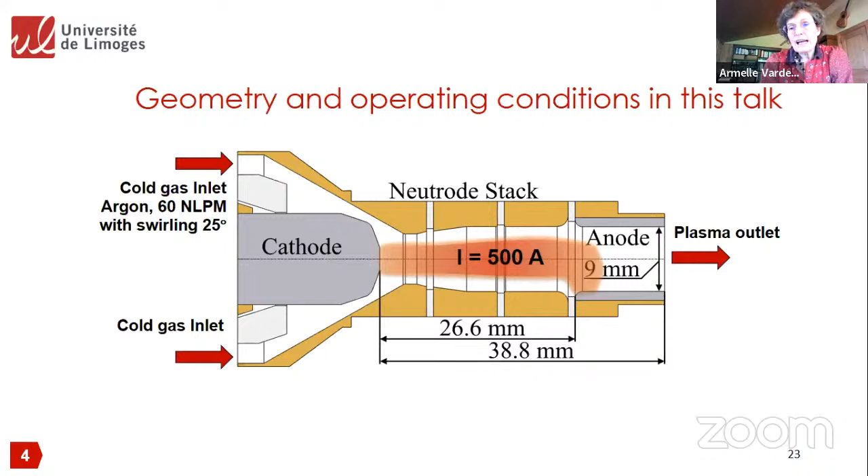Today I will use one set of operating conditions: pure argon, 60 liters per minute, injected at an angle of 25 degrees. The arc current is 500, and the nozzle diameter is 9 millimeters. In the model, we have implemented the actual materials: tungsten doped with lanthana for the cathode, and

copper in the neutrode and anode part. The computational domain extends from the rear of the cathode to the nozzle exit, and we have added an outside domain which is nearly as long as the torch itself.

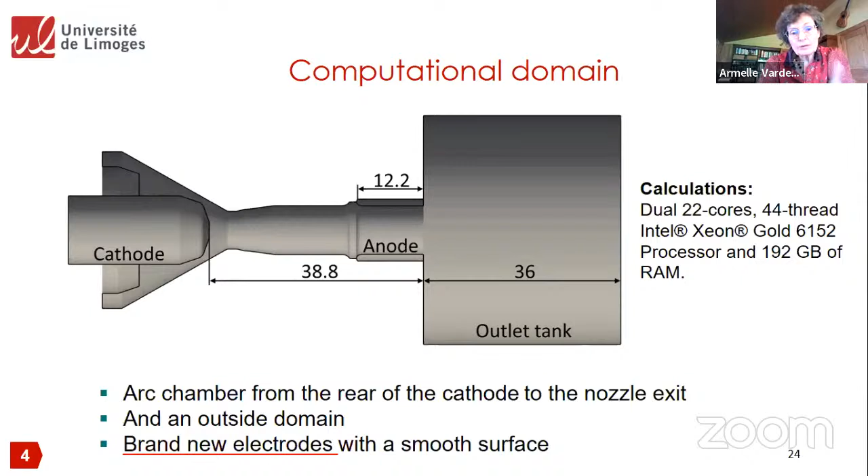And there is another assumption. Up to now, we have no choice. We have to select this assumption that we have a brand new electrode, that is, the surface of the electrode is smooth.

Why is it important to have an accurate calculation of the magnetic field, and which boundary conditions should we use to calculate it? If you look at the momentum conservation equation, even if you don't know it, there's no problem. Just look at the source term which appears in this equation. This source term depends on the magnetic field and the electric current density. So if one of them is wrong, for sure the velocity of the gas could be wrong.

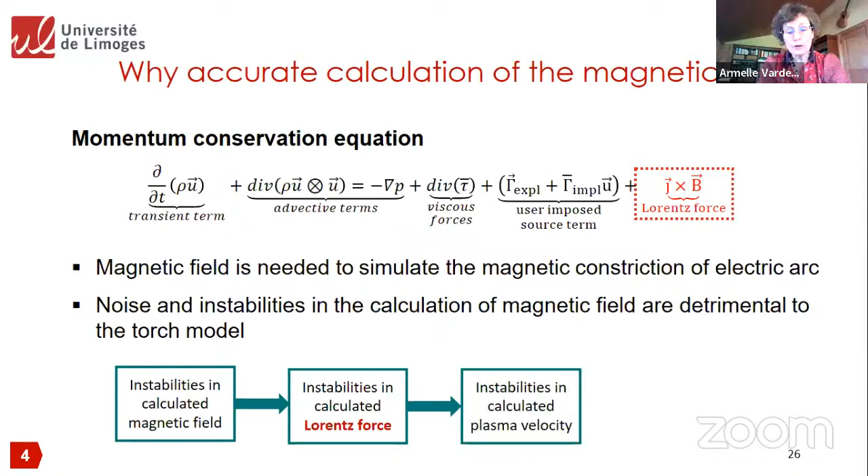And also, we need an accurate prediction of the magnetic field to simulate the magnetic constriction of the electric arc. In fact, if you have some instabilities in the calculation of the magnetic field, you will have some instabilities in the calculation of the Lorentz force, so also in the plasma velocity and in the plasma jet.

Now, when you look at the real world, you have the magnetic field, and the source of the magnetic field is the circulation of the current, so the electric current density. They are linked by the equation you can see here.

But in the numerical work, it's different. The magnetic field will be derived from the magnetic vector potential A by this equation. So when you think about the boundary conditions, you have not to think for B, but for A.

And generally, there are two types of boundary condition we can use. One is to impose some null flux at all the boundaries, except far from the arc, where you put the value equal to 0. The other boundary condition, which is perhaps more demanding, is to calculate the value of A at all the boundary by using the Biot-Savart law. You have surely seen this law in your previous studies.

Now, just look at the difference in results we can get when we change these boundary conditions. Here, we have used the null flux on all the boundary conditions. And when you look at the field you get, it seems that it's not so good. It's very strange—you can see that especially at the cathode tip, at the nozzle outlet, and the anode wall, they look wrong.

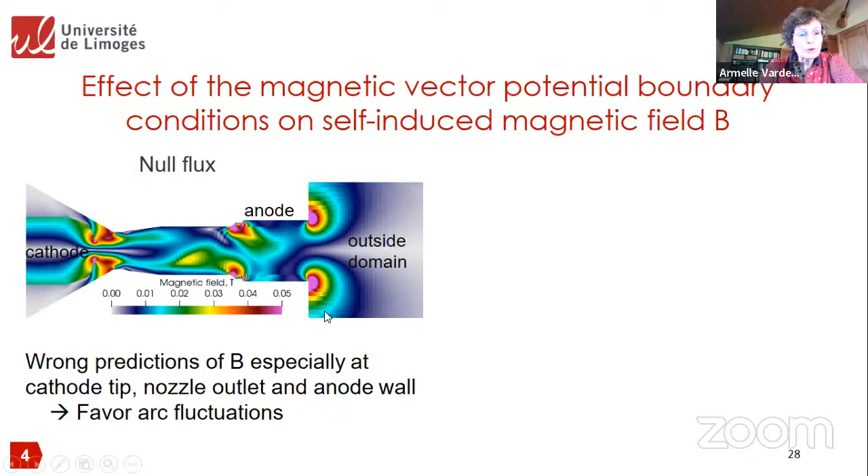So first, for people that want to deal with models of plasma torches, don't forget to draw some pictures of your magnetic field before going further with your model. From that, you will learn a lot about the accuracy and reliability of your prediction.

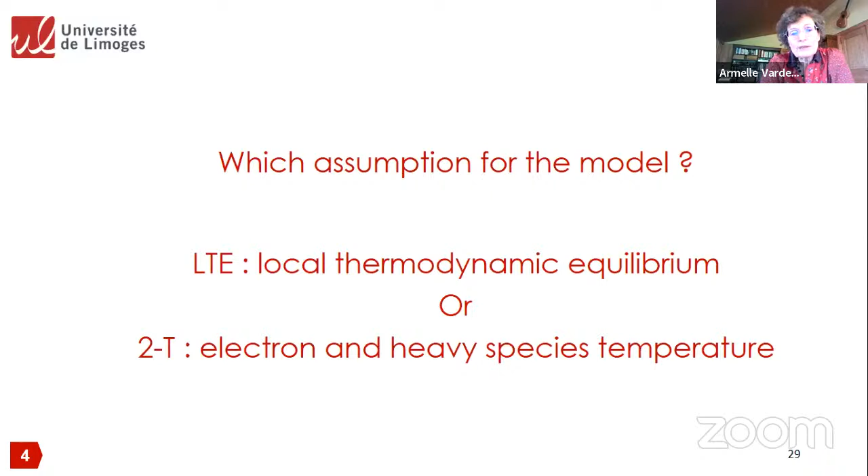Now, the second point is about the assumptions of the model. Generally, the models of plasma torches can be ranked in two categories: one deals with local thermodynamic equilibrium, the second deals with what we call two-temperature models.

Local thermodynamic equilibrium considers only one temperature for all the species in the plasma. That is, we assume that everywhere in the plasma there are enough collisions between the electrons and the heavy species so that they both have the same temperature. This model is easy to handle, and the properties of the plasma that you need to solve your equations are easy to find. Generally, you can find them in the literature, but they really fail to give real predictions in the arc periphery.

The second category, generally called the 2-T models, use two temperatures, one for the electron and the other for the heavy species. Of course, now you have to solve two energy conservation equations, and the convergence of the model will be difficult to achieve. But in compensation, you have more accurate prediction in the arc periphery.

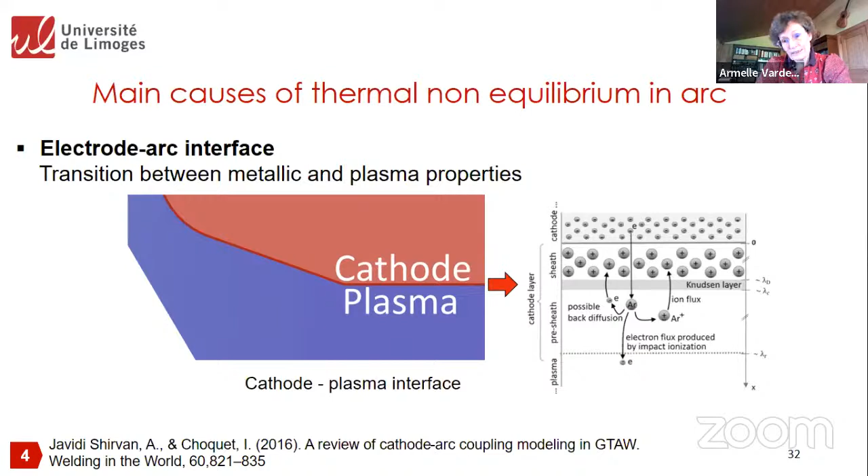Another place where you have a very high departure from equilibrium is the interface between the cathode and plasma, or anode and plasma. At this very specific location, you have a stack of specific layers in which the properties of the metal have to be progressively adapted to that of the gas, and the electrons issuing from the cathode have to be progressively adapted to the plasma.

If you want to take into account this thermal non-equilibrium phenomena, you now have to solve two energy conservation equations, one for the electron, the second for the heavy particle temperature. And you should also add some model about this layer that develops close to the electrode.

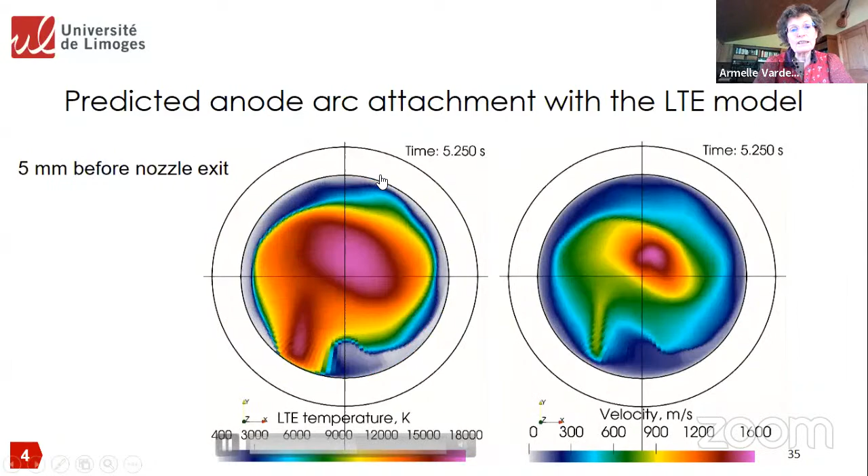If we look now at the velocity and temperature profiles we get at the nozzle exit, this is a cross-section of the nozzle, and you can see that with the LTE model we have some rotation of the arc, induced by the swirling injection of the gas. Now, if I look at the nozzle exit with the 2T model, you can barely see any movement of the arc. Here, the arc hardly moves.

Also, we can compare the arc voltage predicted by both models to the experimental one. With the LTE model, the predicted voltage is about 92 volts. With the 2T model, it's about 75, and the experiment gives about 71 volts. So you can see that we are becoming closer to the experimental data.

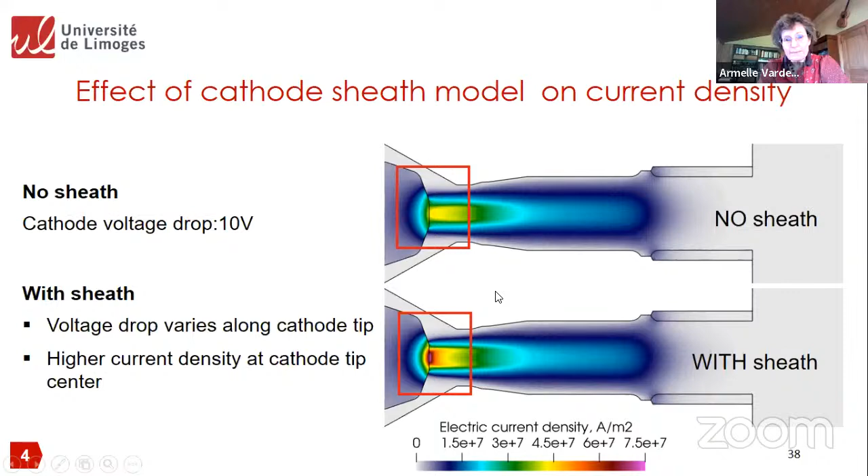What we can see is that we have a much higher current density at the cathode tip center when we have the sheath model. In addition, with this sheath model, we don't need to use some variable selected by the user, like the cathode voltage drop, because this will be predicted by the model. So with the sheath, we have some important differences in the prediction of the current density at the cathode tip.

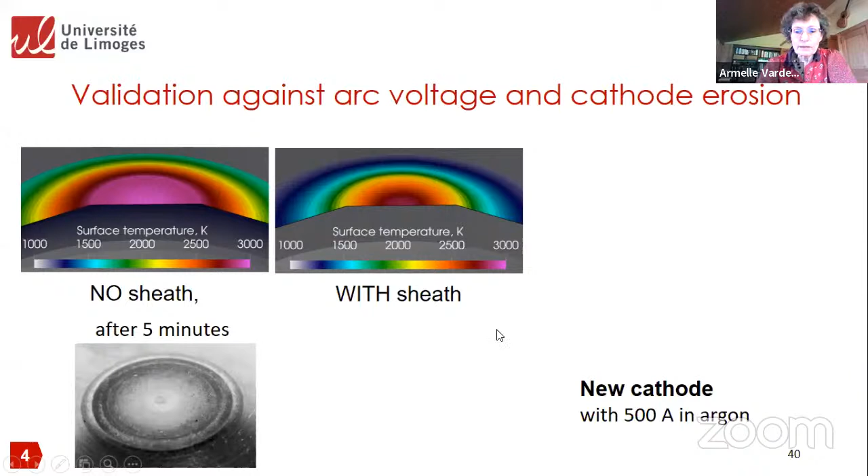Is it important for the prediction? Yes, as you will see here, you can see the distribution of temperature at the cathode tip without the sheath model and with the sheath model. If we compare it with a new cathode that has been operated for 5 minutes or 60 minutes, you can see some melting of the tip of the cathode, and this higher temperature is well predicted by the sheath model. It's assumed that this melting is produced by evaporation of the dopant, but we don't know for sure—we have not taken into consideration the diffusion of the dopant in the cathode and its evaporation. This is for the future.

Now, a possibility is also to look at the voltage. You can see that with the cathode sheath, the predicted voltage is 71 volts, which is very close to the experimental one.

Now if you look at the profiles you get at the nozzle exit, here for velocity and here for temperature, what you can see is LTE gives really not so good prediction for the velocity—at least we assume they are not so good. But for the plasma temperatures, there are not so much differences in the prediction at the nozzle exit, whether we use LTE, two-temperature, or two-temperature with and without sheath.

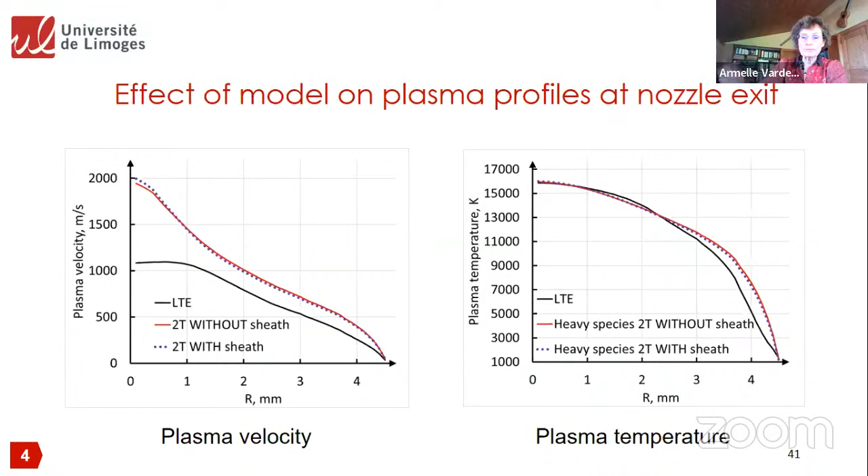So it depends on what you get, because you can use the profile predicted from this model for a model of material processing in the plasma jet. At the nozzle exit, perhaps the effect is not so important with the inclusion of the sheath in the model.

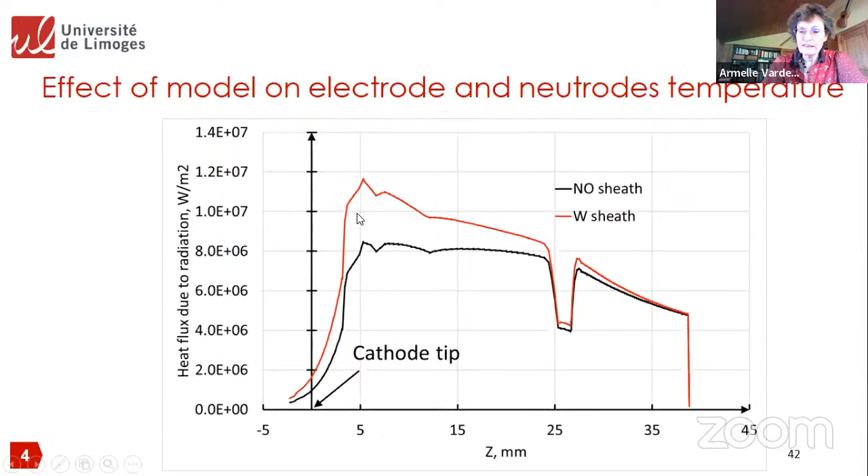So as a conclusion, an accurate and reliable model of plasma torch operation can now be used as a basis for the development of a digital twin of the torch, because it's important to have a digital twin not only of the whole spray process, but also of the torch itself. This is very important, in particular for the manufacturers of the torch, like Oerlikon Metco or Metec.

It can also be used as a basis for the mechanistic model of plasma spray. But for that, it should include the electrode in the computational domain. It will need to consider the thermal non-equilibrium in the arc fringe, but also at the interface between the electrode and the plasma. And it needs also a very accurate description of the magnetic field.

I will stop my presentation here, but in fact there are many other questions about this type of model. For example, we don't take into account the chemical non-equilibrium. And one of the key issues is how we can predict the anode—this is an important point and a weak point in thermal spray. It's how the anode will erode during the process and how this will affect the processing of the materials. Thank you very much for your attention.